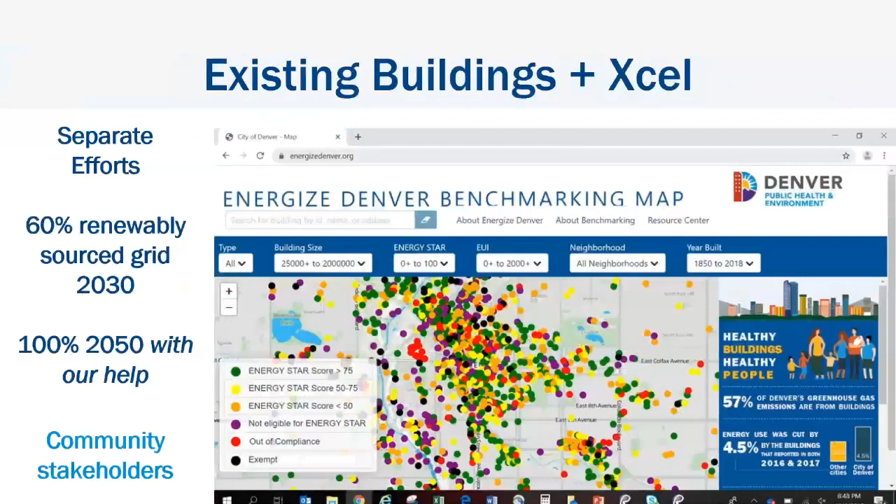There are separate ongoing efforts that the Office of Climate Action, Sustainability, and Resiliency is leading. I'm just not going to talk about that, and we're obviously not talking about that today with our IECC discussions, because that's not really what that code deals with.

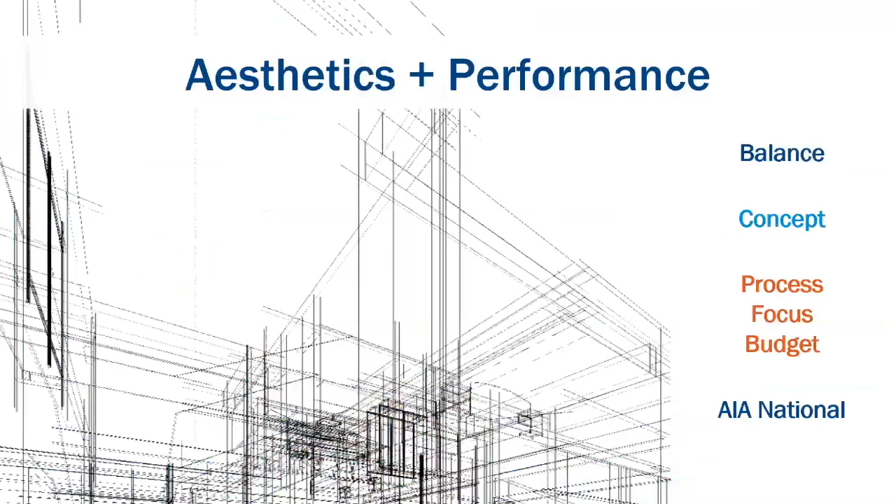Related to new buildings, it is our goal through the work we're doing in the coming years to get performance on the same plane with aesthetics. This is something that's been happening nationally for years, it's a process shift, and the changes and amendments we make to the IECC will help to support that shift.

We know that we can't just pass a bunch of rules and run away. We want to work in conjunction with the community, and when I give this lengthier presentation, I say that about 200 times. We don't do anything without working directly with the community to make sure that we're bringing everybody together along.

We're not just writing regulations in a bubble. It's important to mention the Office of Climate Action, Sustainability, and Resiliency, which I'll call CASR from here on. This team existed under DDPHE, the Denver Department of Public Health and Environment, and was formed as a separate office reporting directly to the mayor earlier this year, elevating climate action. It's 13 people right now with a plan to substantially add to that team, though current financial times have put some of those plans on hold for now, along with everything else. That's not a CASR statement, it's just where we are as a city right now.

That team has helped set the groundwork and lay the foundation for the work we're doing with the codes, starting with the 80 by 50 plan 2 years ago, a commitment to lower our greenhouse gas emissions 80% below 2005 levels by 2050. New buildings are part of that, with a milestone to get to zero net energy for all new buildings by 2035. That's really soon, that's 5 code cycles away.

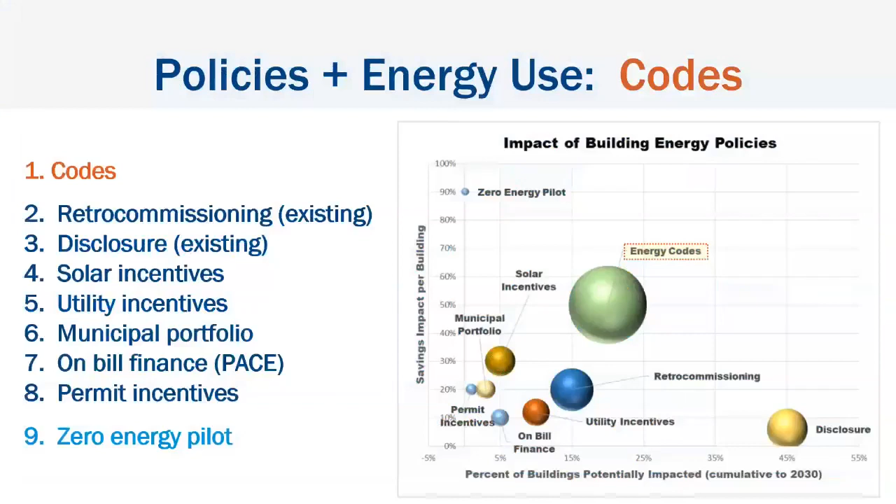Why are codes so important? Because even though we have some really high-performing, awesome projects that I could go on about all day because I'm so excited that we have them in Denver, they overall are not responsible for the major impact we need to make on our building energy use. The vast majority of buildings that comply with the mandatory codes are the big green blob that we have to address. That's why we really focus on our codes.

The CASR team secured funding through the American Cities Climate Challenge, which is awesome. It's money being given to 25 U.S. cities, $70 million over the course of 2 years, and it's helped us with an IECC compliance study, which is helping us understand what to target in our codes, what to target in our plan reviews and inspections, and how to work better with our team so we can get buildings to better performing outcomes. We are also going to need to target, with each of the next 5 code cycles, some very aggressive Denver amendments.

We started that process with the Denver amendments this year. We learned through the process. We asked the committee not to necessarily work towards one overall goal, but to do as much as we could, and we got pretty far. We got 15% better than base code, but it still didn't put us on the trajectory we needed to be on. So we know the process in the next 5 code cycles is going to require a partnership with the community to figure out how we work to a goal, not considering each amendment in isolation, but all together to get to a goal in the most painless way possible. That might mean we need to add workforce training or provide other support and resources.

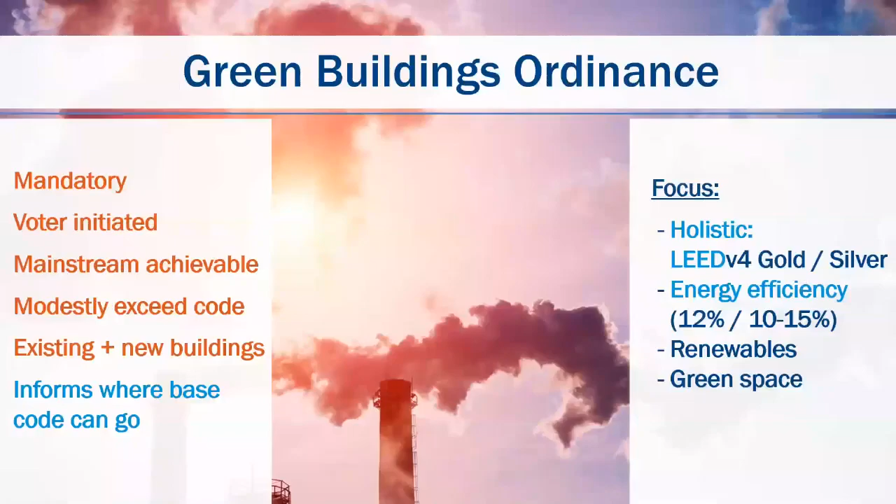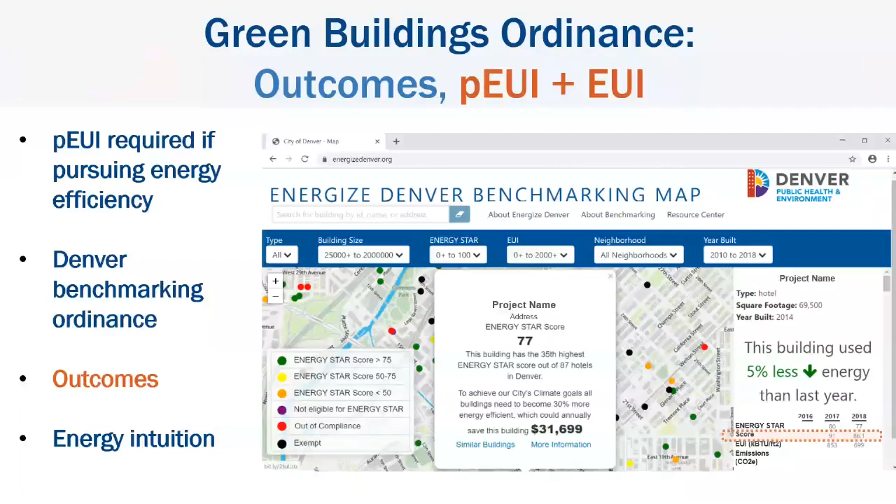We are using the Green Buildings Ordinance to learn about our buildings, and we'll be doing something similar with IECC submittal requirements, just to start to close the gap between our building outcomes and what they're designed to do. And this is because we're seeing that that gap is pretty broad. Our buildings are being designed at a high level, but they're not performing at that level, often using 2 to 4 times as much energy.

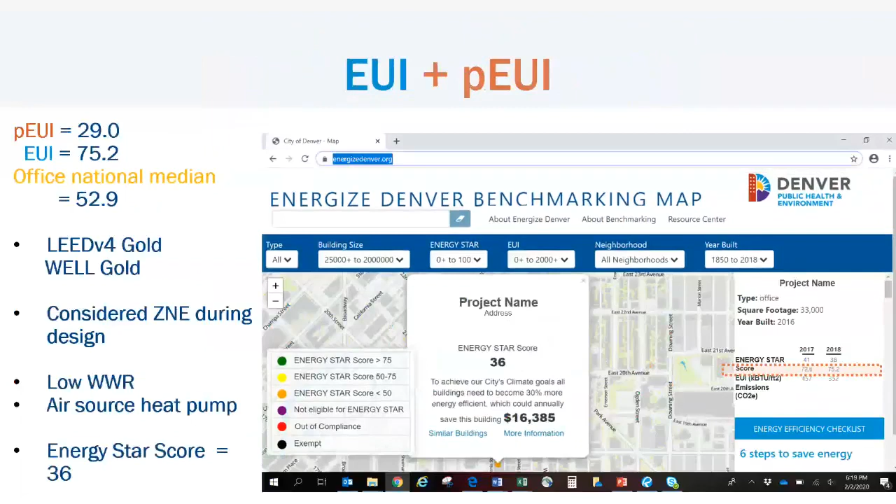That's not because any one specific team member is failing at all. It is a big, complex collaboration to get a building to perform the way it's intended, and that is the gap that we are going to be aiming to close so that we can support the Denver community in achieving our goals and keeping all of our citizens healthy and well provided for.

So the next group of slides, I'll just kind of flip through just to say that we, again, see the goal of sustainability as intermingled with equity and affordability as one goal. We're working across a variety of different city agencies and at a variety of scales. It's not just that we are addressing new buildings through the codes. There are a lot of other efforts going on at the district scale and the broader scale, and we're looking at the existing buildings and the sites and the neighborhoods.

And we're looking to our project teams out in the community to increase communication and also collaborate in a similar way across all of the entities who contribute to projects, and to really start drilling in and understanding the metrics related to energy performance a lot better.

So there are other things beyond code work that we're also looking at, other opportunities, other things that other cities are doing. We're looking at the planning level. We're looking at how we can integrate all of the different aspects of sustainability into the design of projects that are being built in Denver, because we're looking to how all of those projects contribute to the long-term viability of our community and our future.

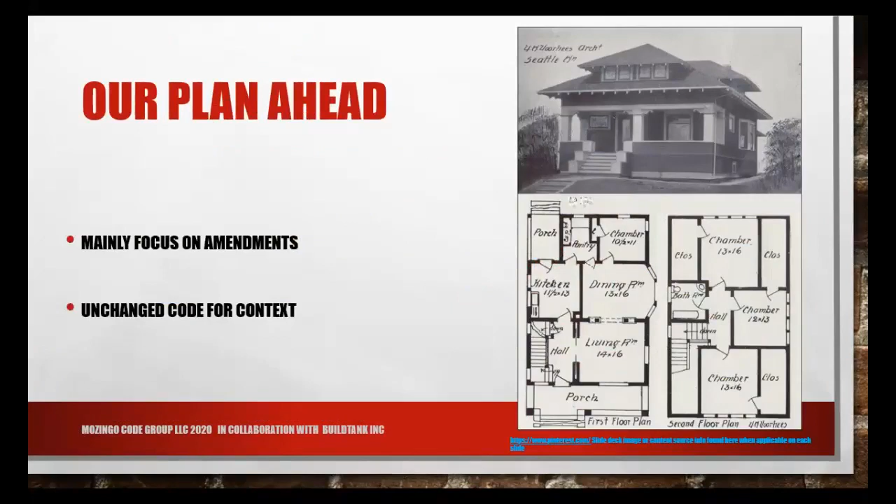Let's just move forward. A couple of things you have to know, there were some changes made. Typically, the IECC treats residential and commercial a little bit different than the other codes by just saying that maybe you could have some R2s, 3s, and 4s that are considered residential, even though they're built out of the IBC, so people automatically think that they're commercial and try to submit for commercial. Because there's been a lot of confusion over that, Denver did change their definition of a residential building to remove those R2 buildings. So R2s, your apartment buildings, are all going to be commercial now.

And that's been removed from there. So just want to clarify that when you're submitting a project for Denver that's R2 or an apartment building, you're going to submit it under the commercial requirements of the Energy Code. That being said, that means we're not going to be discussing apartments today because today is residential.

A pretty good change to bring some, to take the confusion out of whether it was 3 stories or less or 4 stories or more, and now it's just all one section of the code, so that's kind of nice.

We are going to go over some definitions today, just some different ones, but I'm not going to go over them right now. I'm going to go over them while we're talking about where we need to talk about them, right? So there's some new definitions that got introduced to the Denver's IECC, and a lot of them also will be in the 2021.

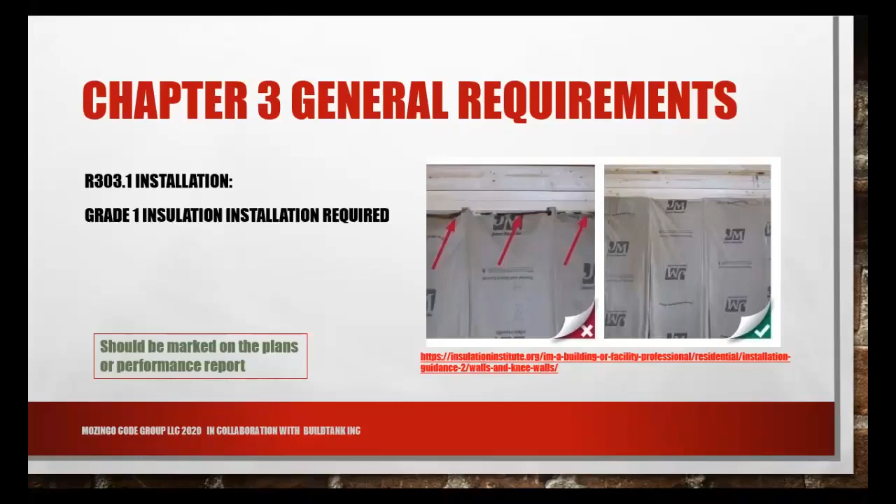All right, so we're going to talk a little bit about paths of compliance. In order to move forward, there were some changes. We still have the prescriptive path, which also includes ResCheck, and we have the simulated performance path and the ERI path. If you're going prescriptive, that's just 'tell me what I have to do and I'll do it' — you follow the book. There's not a lot of trade-offs in there unless you use the UA path, which a lot of people know as ResCheck, which allows you to trade off some insulation and windows as long as you keep the right U factor.

The change in that prescriptive path is bringing in this R407, an additional efficiency package option. The idea here is just like commercial — commercial has been doing this since 2012. The idea is that we want to bring in more efficiency in our buildings. So how do we do that and still have a building that's buildable, or affordable to build? We could have cranked the code down by another 5 or 10 percent.

But instead of doing that, we say okay, here's the code requirements now, and on top of that, here's some options. You choose how you get the other 5%, or how you get the rest of the way there. So it provides options, and we'll go over those when we get to that section. It's not like we're trying to go way, way above code and be an above-code program. This is about meeting the minimum requirements — you have to choose that additional option, but it's there so you can choose how you get the efficiency out of your building, what works best for your design, rather than just being told how to do it.

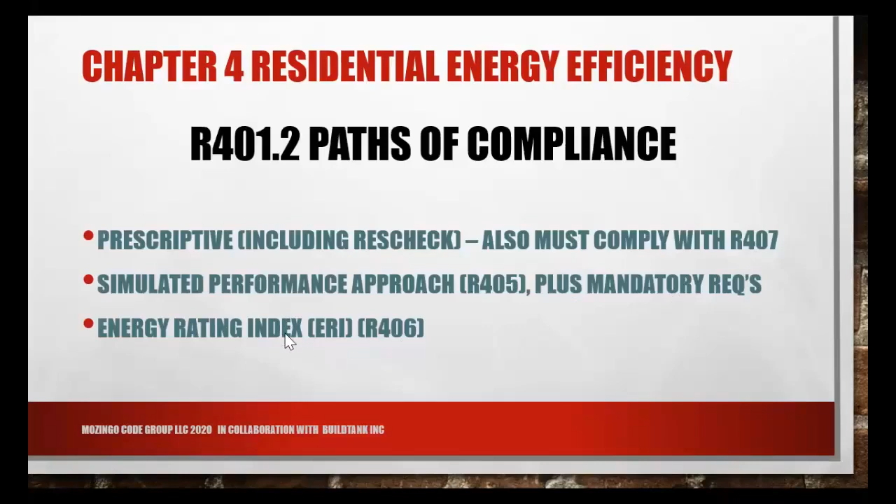What do I mean when I say mandatory? The code, at least through 2018 anyway, has the word mandatory in it. So what does that mean? Isn't the whole code mandatory? In the energy code it's a little bit different. It allows trade-offs here and there. So the word mandatory is letting us know that no matter what path you choose, no matter what you're doing, these items can't be traded off. You have to do them.

They're usually things like you have to seal up your thermal envelope and get good air leakage. You have to do good lighting, you have to do your right mechanical efficiencies and mechanical controls. But insulation, R values, U factors, those kinds of things can be traded off. Even duct leakage and air leakage can be traded as long as you make them up somewhere else. But the other things are mandatory, you can't trade those off. That's what it's talking about.

So when I'm doing plan review, I'm always looking, did they use a trade-off path? But no matter what, those mandatory requirements are for every path. I definitely have a little checklist where I go through and make sure they've met the mandatory requirements.

Prescriptive is a pathway, so you could choose that path. That's just, tell me what I need to do and I'll do it. Res check fits in there, or that UA trade-off path fits in there, so if you choose that path, you can trade off some envelope as long as you make it up. Maybe you put in a better window to lower the insulation in a certain place, or vice versa. But that's about it. It is a pathway, and you can choose it.

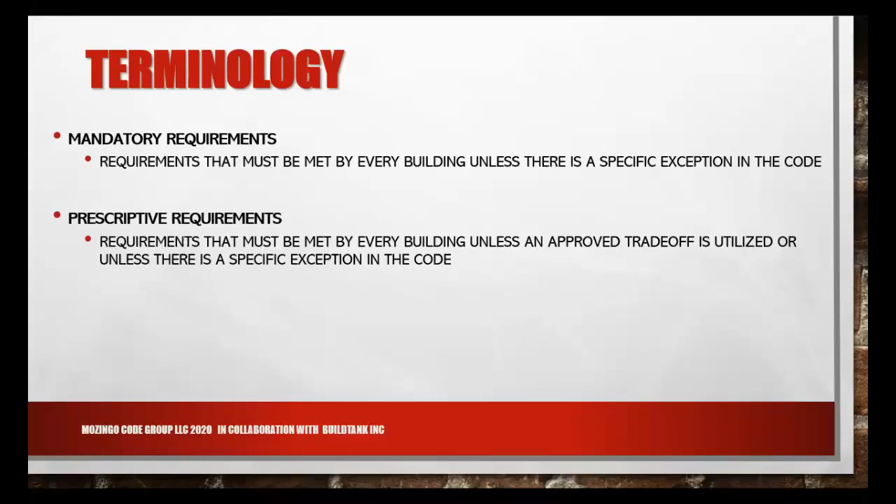I just don't see very many people do it unless you're way out in some remote area where there's not a lot of people that know how to do performance. Sometimes it can be more expensive to go prescriptive because you have to use these specific values, and you can't do a lot of trade unless you're using a little bit of res check.

And then you have performance, which is looking at the overall performance of the entire building. That usually has a third party involved that knows how to use that equipment or the computer program software, and can compare the building that you want to build to the building that's the code requirements, and how much energy you're using the way you want to build it. It allows more trade-off.

So the thing that I would say is the documentation on these paths, as a plan reviewer, what has to be on the plans. Prescriptive is strictly right out of the book. Are they doing what it says? If it says that it needs an R20 in the wall, is that what they're doing?

And performance is looking at that report that you get from the rater or whoever that says, okay, we're not going to do that R20, we're going to do an R15, but we're going to make it up over here with our really tight envelope, or really good lighting, there's different things that you can trade off. So looking at those reports and making sure that they match the plan.

That's the biggest thing that I see as a plan reviewer, is that I'll look at a set of plans. The rater or whoever's making the res check is putting in whatever value that they want to get it to pass. But when you compare it to the set of plans, the plans might say 2x6 construction at 16 inches on center with R20 in the walls. And you look at the report and it says 2x6 at 24 inches on center with R15 in the wall. Well, the plans have to match so that that's what's getting built. So really that's the biggest thing between doing plan review to those paths.

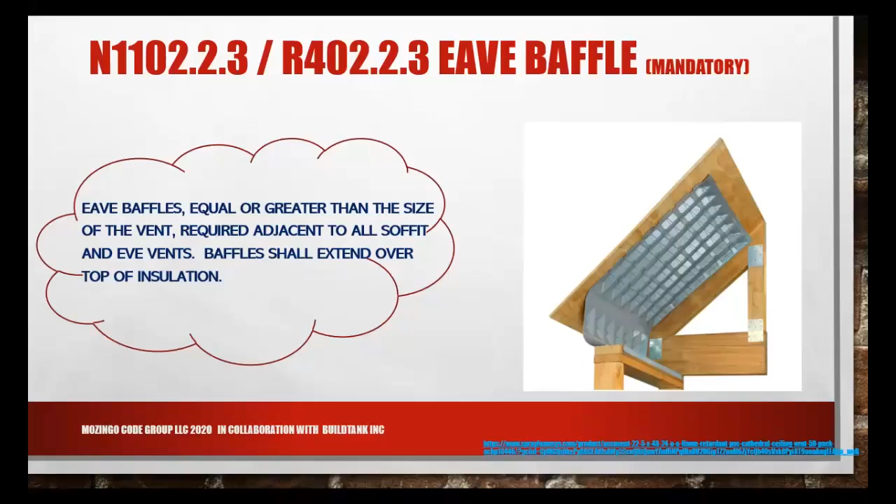I want the inspection process and the construction process to flow. I don't want them to get held up. It takes 2 seconds to put a stamp on there that says don't forget your eave baffles. Whether they read their plan or not, if they get held up after I've put everything on the plan, that's a different lesson they have to learn. But I'm going to put everything on there that I can.

So there's some changes for floor insulation. There weren't a lot of changes for any of the other insulations when it came to Denver. The floor insulation change really wasn't in the R-value, it was just in the install, and this will be in the 2021 code also.

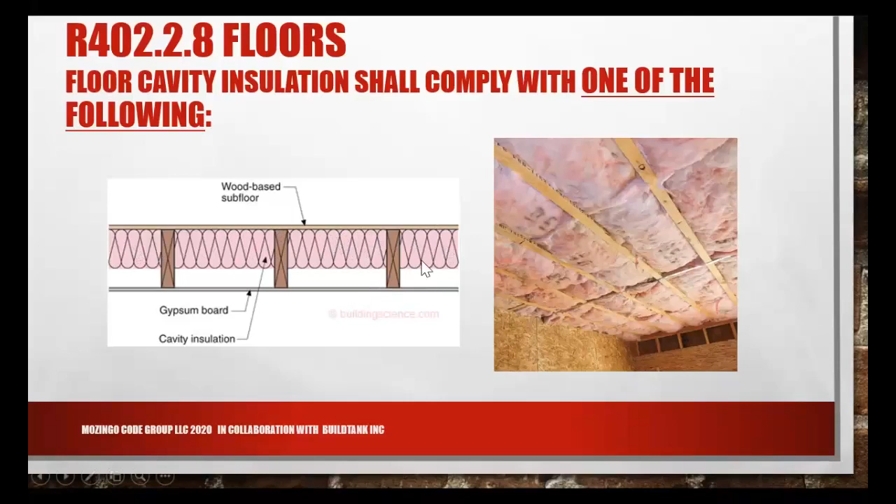So this is still an allowable way, but it's just one option now. You can also drop your insulation down to the bottom of the floor, put in your full R30 right on top of the sheathing or drywall or whatever is there, drop it down as long as you fully insulate all the way around, so you're basically building this nice insulated plenum. Then you can run your ducts and pipework in there, and they would be inside the conditioned space because they're on this side of the insulation and the air barrier. So that's an option.

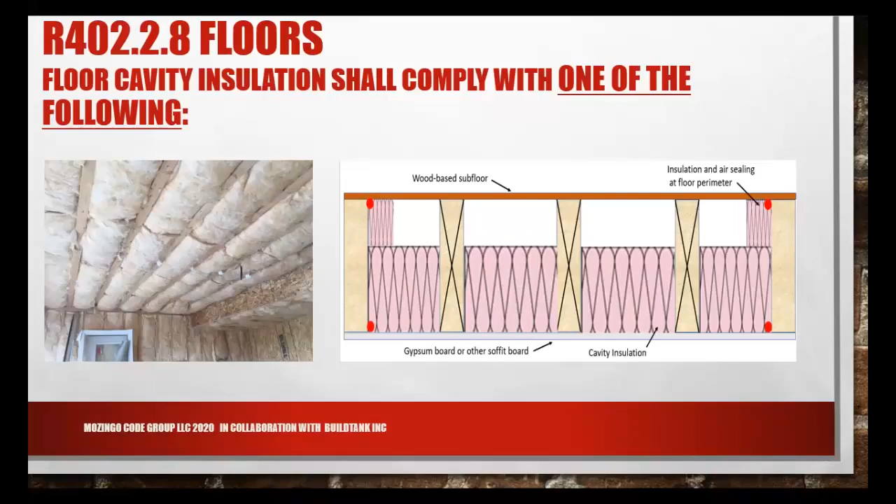Sometimes you can't get an R30 in the floor cavity, so another option is, yes, drop that insulation down there, get as much as you can, and then get the rest of the way with an insulated continuous insulation on top of your drywall or your sheathing. So you could do your cavity insulation plus your continuous, add the two layers together to get there. So there's a little bit more options in there.

Those were in there in the '18 and the '15, but it was really hard to read. So Robbie did a great job of getting the code cleared up and getting these sections in there a little clearer and more defined. So those are good options that are in there.

Now let's talk about testing. Testing for air leakage, right? So the code has always required as a mandatory, you can't trade this off, that you do air testing, and your testing is at 3 air changes per hour at 50 pascals. Well, there's a couple things that make that a little bit hard to do, and so Denver has done...

And the 2021 actual code will do this also, but it says okay, we understand that 3 ACH is very easy to get in a large home where you have a lot of volume of air, especially a detached large home where you don't have any attached walls, and you have this large volume of air. 3 ACH with good detail is easy to get. We find that 90% of the people come in under 3 ACH even before that requirement ever got into the code. It's when you get a smaller house or an attached house that it gets a little bit harder to do, because you have less volume and you're dealing with common walls that are hard to seal.

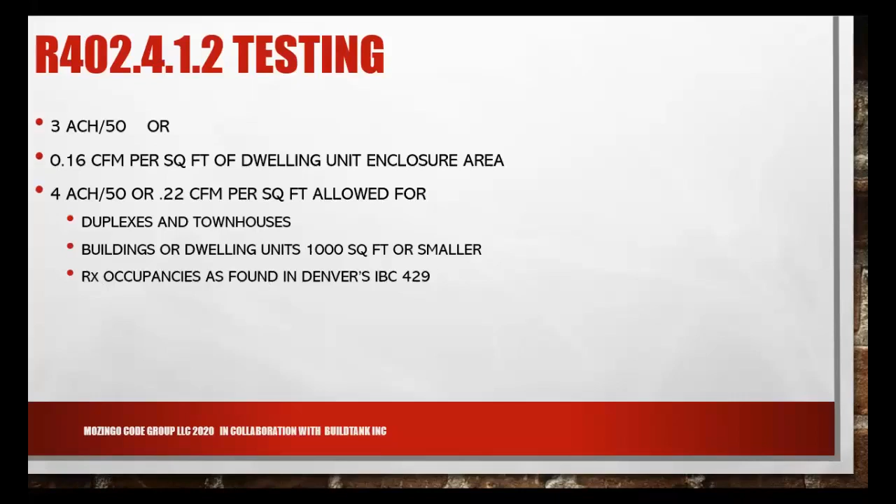It's not a rollback, it's just reality in saying let's give some options so that these guys in smaller houses or attached houses have a fighting chance of actually complying. It's talking about dwelling unit enclosure area, a defined term that's the sum of the area of the ceilings, floors, and walls separating dwelling units from conditioned space to the exterior or unconditioned space. So you're looking at the volume of the whole house, not just square footage.

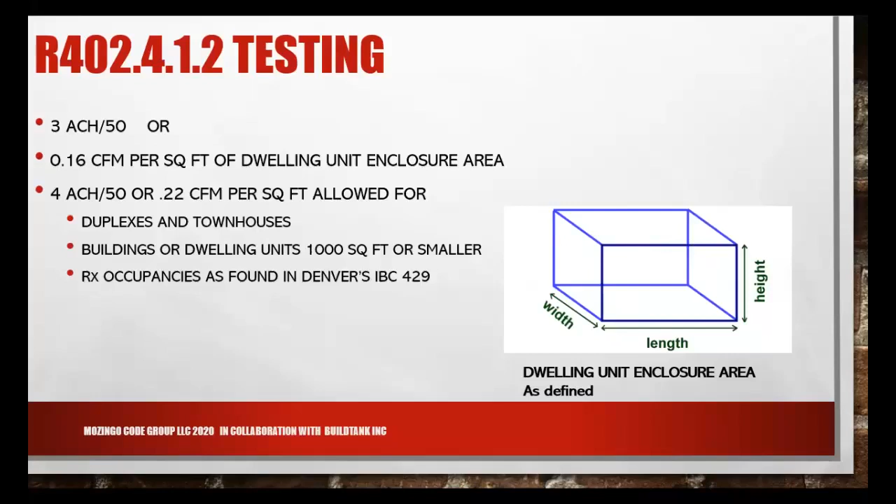RX is a kind of new occupancy in Denver. It's for residential, in the building code. It's a group of 2 or more detached buildings, each consisting of a sleeping unit where occupancy is permanent in nature. They can't have a cooking facility. It doesn't say here, but it has to be 400 square foot or less. You still have to meet your building code room areas, like 7 foot ceiling heights and minimum areas, but can't be over 400 square feet. So there are some requirements in there.

You can build them to the IRC or the IBC. They can't be more than 1 story. We're really looking at no basements, and they can't have a cooking facility - no kitchen, but they have a detached cooking facility that everybody shares.

This is looking at maybe finding a way to deal with homelessness, and making these communities where you can provide smaller units that just have one big kitchen or dining facility joint to all of them. Denver still wants them to deal with homelessness and try to provide these communities, but also make sure they do the due diligence to make sure they're energy efficient.

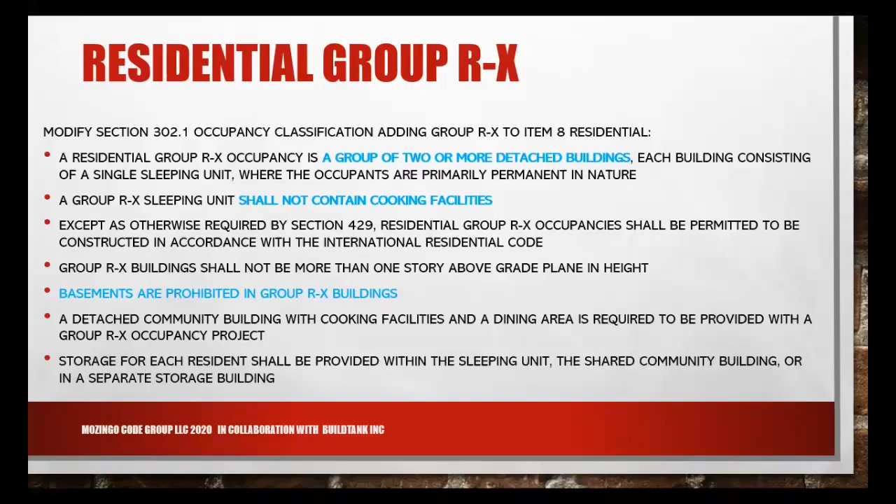Air leakage - we're definitely trying to keep all the nasty air out, the pollutants, the allergens, but we're also saying, okay, we paid a lot of money to heat or cool this space. We want that air to stay inside the building. That's why we're looking at air leakage testing.

The blower door test looks at how much air made it into the building. We have a little bit of air leakage - we want it to be this much, we don't want it to be this much air leakage. We don't want to pay to heat and cool all this and have it go out of the building, and we don't want all of that nasty pollutant to come into the building. So that's what we're trying to do with a blower door test, among other things.

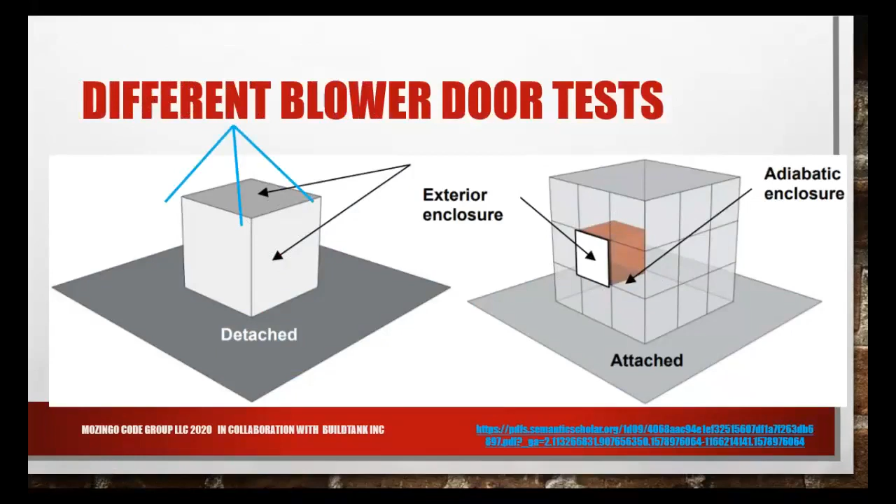There are different kinds of tests. If you have a detached house, it's pretty easy to just test the whole house and the envelope. But when you have a multifamily or townhouse or attached duplexes where they're attached together, it gets a little harder to test that full envelope. So you sometimes have what we call a guarded test, where they look at different areas of the building and you have to compartmentalize the house.

If you're attached, you want to know what the pressure of your house is. You don't want to worry about what they're doing - what is my test, am I passing? That's hard to do because if you have any leakage in the common wall, you're going to be pulling their volume and you're not going to pass. So how do you get a true reading?

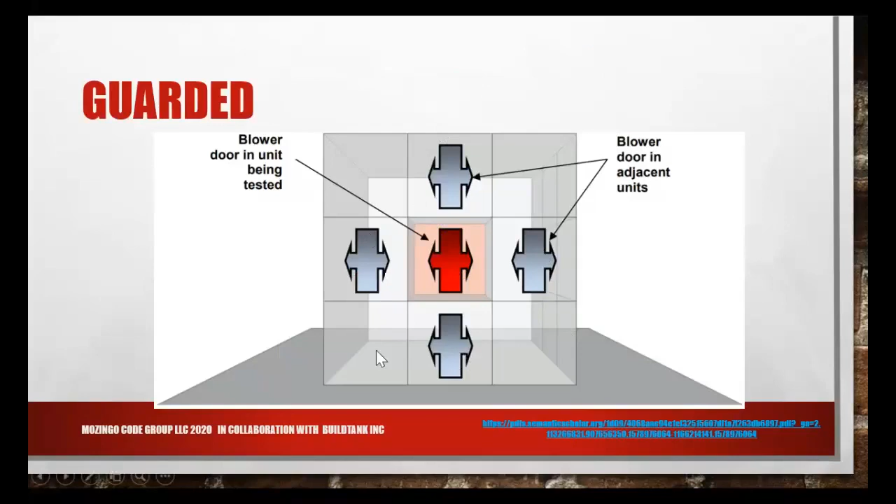It's to really just have a guarded test where you actually put blower doors all around it. Or if you're in attached housing like this, you would test this house and pressurize both houses on each side so that you're really getting a truer reading here, and not pulling that air from the common wall. It's expensive, right? That's why it's important if you have attached housing to really get those details right.

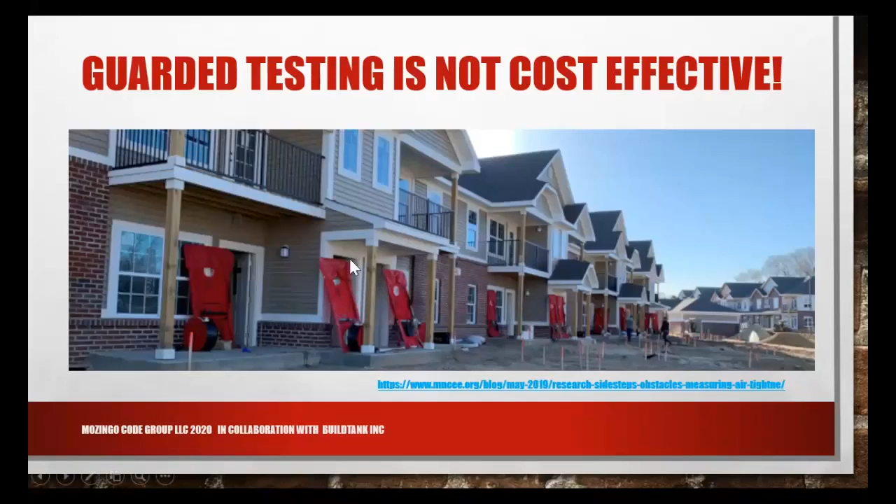If you're a plan reviewer, it's important to make sure that they're getting those details right, so that they pass, because if they get the details right, they could actually test one unit by itself, but it costs a lot to have all of these extra tests or equipment. Not everybody has so many sets of equipment to be able to do this, so it's much more efficient to just get these details right.

At a minimum, I really make sure that I get details for like shower and tubs and fireplaces and stuff that are on exterior walls, because that's hard to come back and fix after the fact. Once that tub gets in place, it's hard to get behind there and make sure I have my air sealing and everything. So I really do take some time to make sure that is in place, and it's good to get this detail as a plan reviewer. That's about what you're going to get for air sealing.

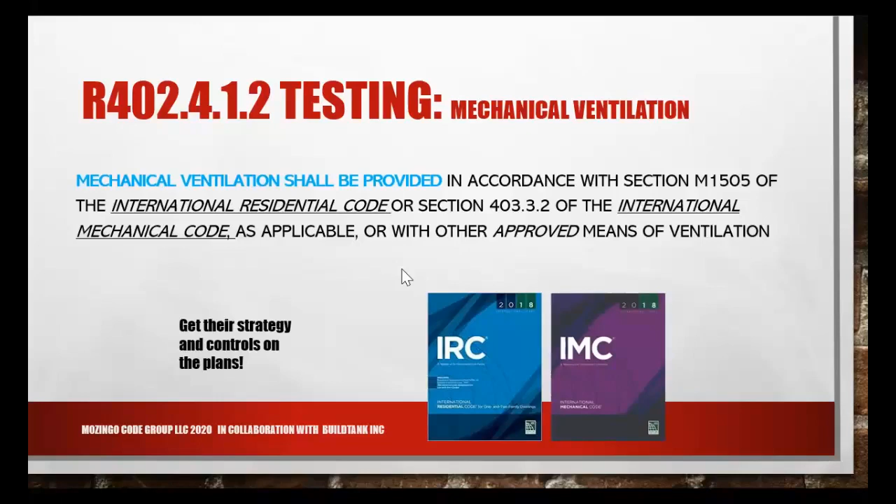And it never says that it's not allowed to run, it says you have to have an automatic shutoff. So what are you looking for? I always ask, what control are you using? Are you running continuously? Are you running only half the time? What kind of control are you doing that just a simple on-off switch doesn't get you there? So those are the kinds of things that I'm looking at in plan review.

Again, the M1505, which is the mechanical section of the IRC, will tell you what strategies you're allowed to use and how much air you have to bring in. So the plan review, that hasn't changed. It will change in the 2021, but it hasn't changed. Right now, you're still allowed supply, exhaust, or a combination system.

In 2021, requiring an exhaust-only strategy will no longer be allowed, because if you're building the house so tight, you don't want to suck all the air out when you don't have enough holes to bring fresh air in. So that won't work in the future, but right now it's still allowed. Just make those comments on the plan.

If I use a positive supply and pump a bunch of air in, eventually as we build houses really tight, even though you're allowed supply only, exhaust only, or a combination, you want to think about the strategy. If you're a designer or builder on this webinar, think about this. If you're under 3 ACH and getting down below 2, you don't have a lot of holes in the building. So if I use supply only and pump the house full of air without enough holes for it to get out, what am I doing? I'm forcing air out, and the holes I do have become larger over time.

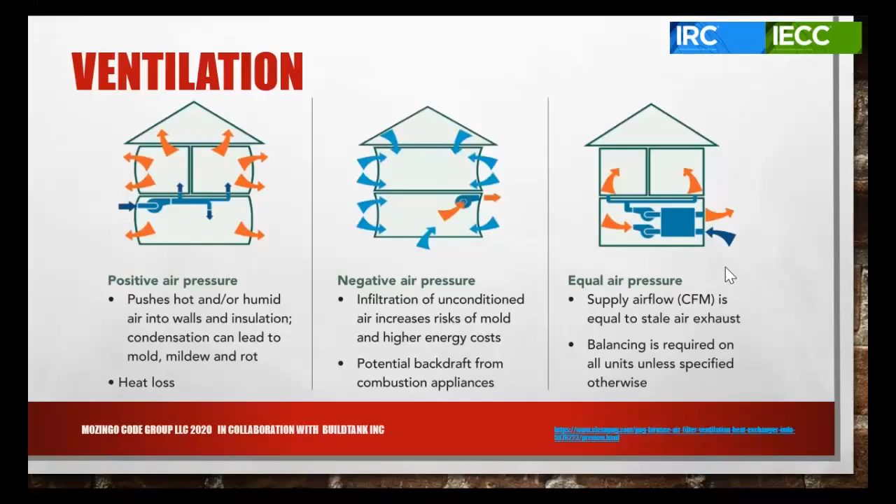If I'm using exhaust only, I'm forcing air in through the little holes I have, bringing in whatever temperature and contaminants are in that air, and forcing stuff through holes it shouldn't go through. At 3 ACH, this strategy still works, but when you get a lot tighter, you might want a balanced system that lets as much air out as comes in, so it flows. It doesn't have to be an ERV or HRV—a lot of people use their furnace system with air into the return side and supply out. There are different ways to make it work.

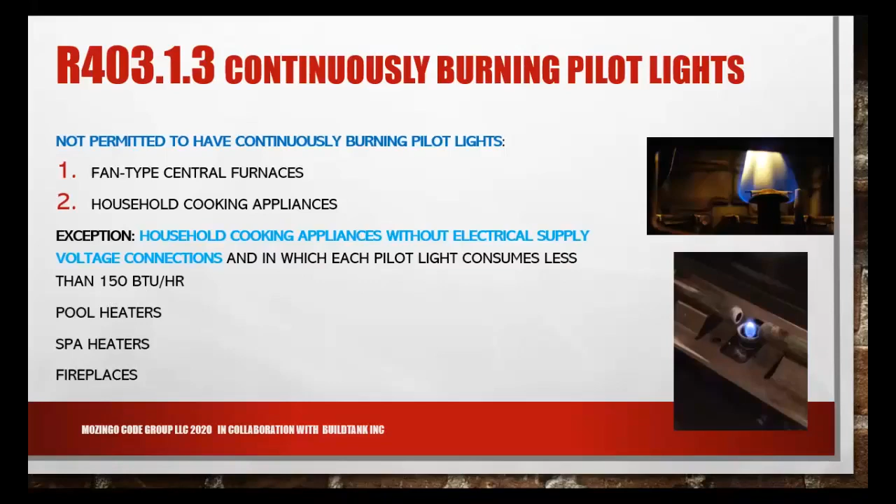Something else Denver has added is addressing continuously burning pilot lights. You don't want this burning all the time since it uses up resources, so we want to make sure they're not continuously burning. There are some exceptions if you have gas appliances without an electric supply connection and it uses less than 150 BTUs. So all the codes are pretty much against continuously burning pilot lights right now.

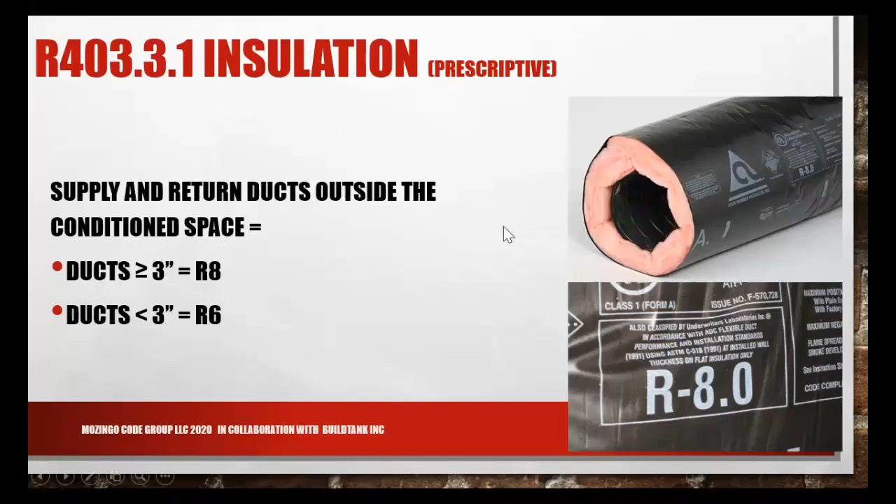Let's get into ducts, section 403, the mechanical section. It used to say you need R8 in the attic on your ducts and R6 anywhere else. The code changed to say if you have a 3-inch duct versus an 8-inch duct, why need the same insulation? So now if your ducts are greater than 3 inches, you need R8, and less than 3 inches, R6—and that's only for ducts outside the conditioned space.

This is a confusing section in the code as it is, and there are some Denver amendments, so I want to make sure we understand duct testing and how we'll handle this at plan review. It's mandatory that you test your ducts. We'll probably see on the next slide that it's prescriptive, meaning the amount of leakage can be traded off, but the fact that you have to test is mandatory.

In the code, it's always been mandatory to test your ducts if any are outside the conditioned space. But in the Denver code and the upcoming 2021 code, you're going to test all the ducts, whether they're inside or outside the envelope. You're still using energy by having a leaky duct, no matter where it's located.

So let's walk through that. All ducts are tested for air leakage, except ducts for ventilation systems, as long as they're separate from your heating and cooling system. There's an exception if the duct system serves less than 1,200 square feet of conditioned floor area—they still have to be tested, but look at the rate of leakage they're allowed. It's a lot higher than your regular leakage, but that's for ducts inside the thermal envelope.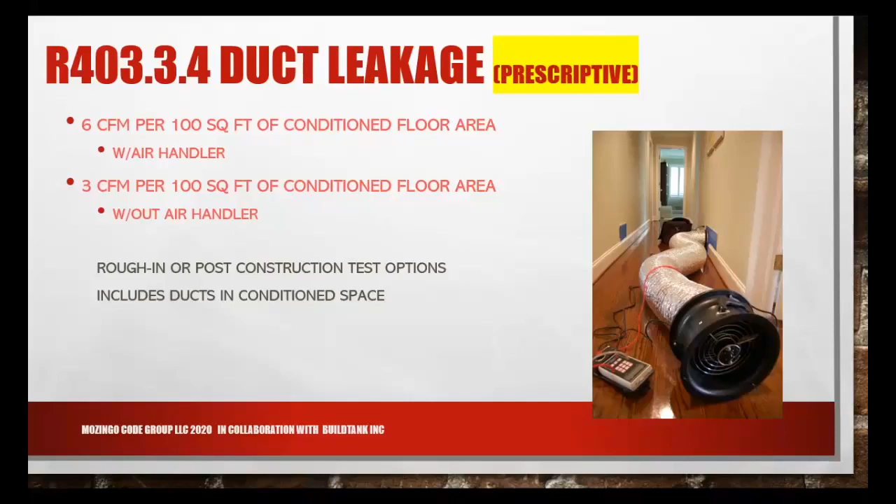How do I determine ducts in conditioned space? If you're going with a performance approach where you can trade things off outside of just insulation and windows, there is a huge benefit. Anybody who's done computer modeling could see that if I model my building with all the ducts inside the envelope, I get a very big credit and can get out of some other things, or lower my insulation, or get a different U factor on my windows, or whatever you need to trade.

There's a big credit for putting your ducts inside conditioned space when you're using a performance approach in that modeling software. So what do I have to do to those ducts to have them inside the conditioned space? This made it into the 2018 code and got a little bit more refined in the 2021. This is just saying, in order for it to be considered in conditioned space, it has to comply with one of the following: completely located in the conditioned space inside the thermal envelope. That's kind of a given.

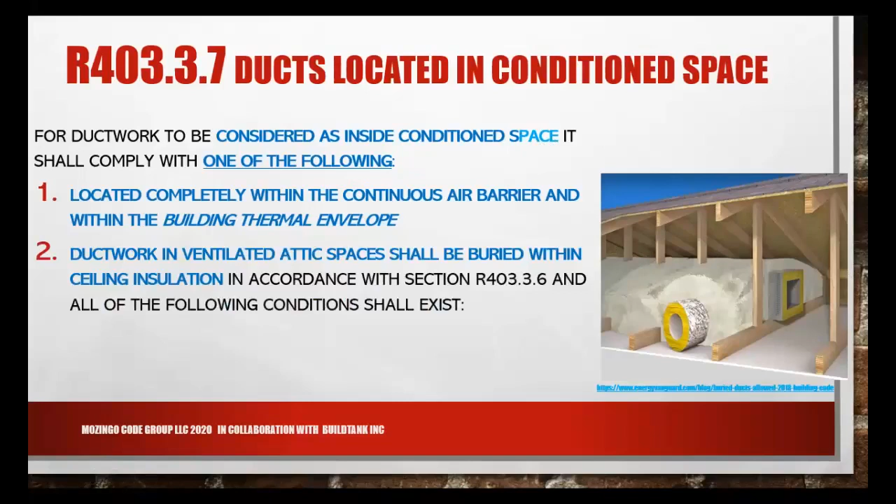Or you could bury your ducts. So if you're in a ventilated attic and you're putting your ducts in the ceiling, you could still call those ducts inside conditioned space as long as they're buried accordingly. There's a requirement in the code that says put a certain amount of insulation under the duct, insulate the duct, and a certain amount of insulation over the duct, and then it can be called in conditioned space so that you can get that credit in performance.

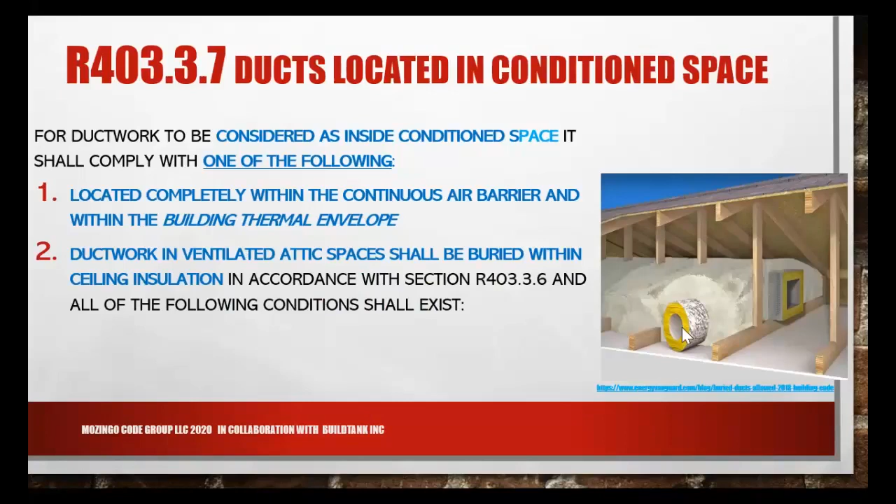And you have to decide, is the expense of burying them worth the credit that you get? Usually it is, but it's also really great for handling moisture issues in the attic and all that condensation. So it is definitely a huge benefit. And to be honest, the National Association of Home Builders are the ones that got this into the code because they found that much benefit in it.

So, into the national code. All right, let's see, we talked about ducts in conditioned space: inside the envelope, or buried in your attic.

The ceiling insulation R-value installed against and above the duct must be greater than or equal to the ceiling R-value. So by the time you add up all the layers, you're at least equal to the value of insulation required by code.

You can also call it conditioned space if it's located in the floor, like a floor over a garage, as long as the air barrier is between the garage and the house and the insulation. So there's an air barrier between the insulation and the unconditioned space, maybe a crawl space, wherever it is. It's installed according to your option in a floor, either against the sheathing or dropped down and installed correctly, and you have at least a minimum R19 below the duct.

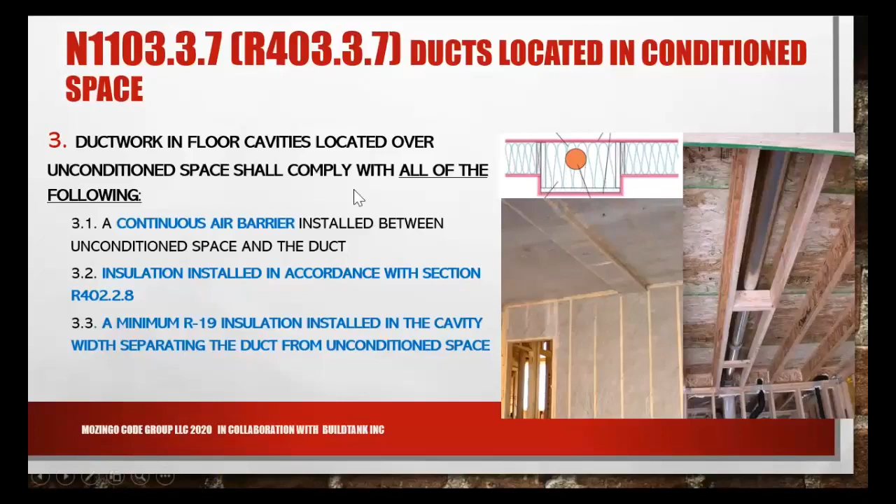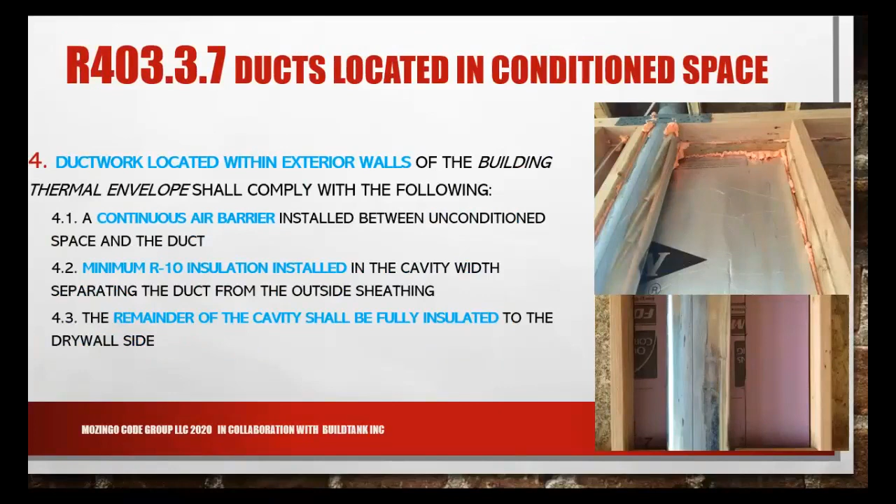So that's if it's in a floor, and then you can also do it in a wall, if you want to put your ductwork in an exterior wall. Most people are getting away from that practice, but you can do it. You just have to put a continuous air barrier between the duct and the unconditioned space, minimum R10 in the cavity, and then the rest of the cavity is filled. So there's some different requirements there.

But actually they're options, so I call it a requirement, but there really are a lot of different options. That's what I love about the 18 code, is that it provides more options than any other code did. You might get more efficiency out of it, which is just a bonus, but it gave you so many more options. There's a lot of people trying to move to a newer code right now, and I'm telling you, 18 has the most options, and Denver even added more options, so that's great.

Whole house mechanical ventilation system just means whichever fan you use for your ventilation system has to meet this efficacy. Now if you have a range hood and you're not using it for your ventilation system, as a plan reviewer I don't go and make sure everything is this efficiency.

It's only if it's the one they're using for their ventilation system. I'm doing a residential study right now in Colorado, and this came up, and PNNL and DOE clarified that, no, I'm not out there verifying that every single fan is this efficiency. I'm verifying because we're just talking about the fan in the whole house mechanical ventilation system that's required - which one did they use, an exhaust-only strategy or whatever - that needs to be that efficiency. So just make sure you're looking for that.

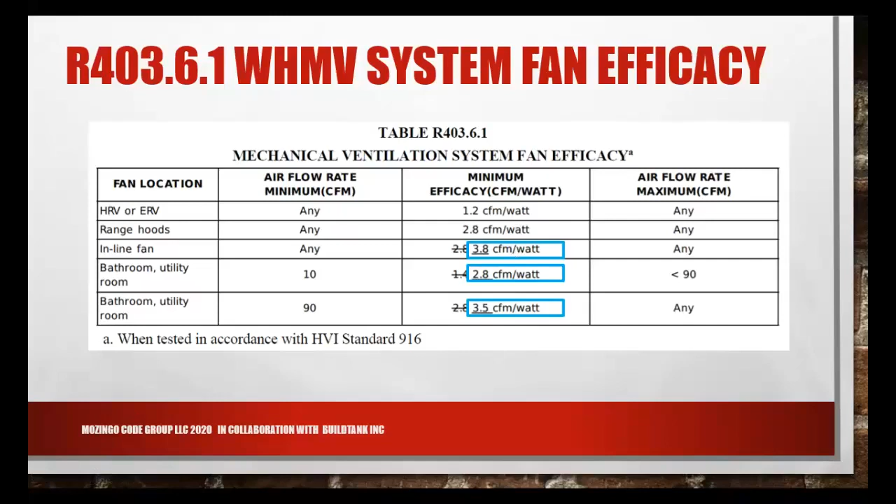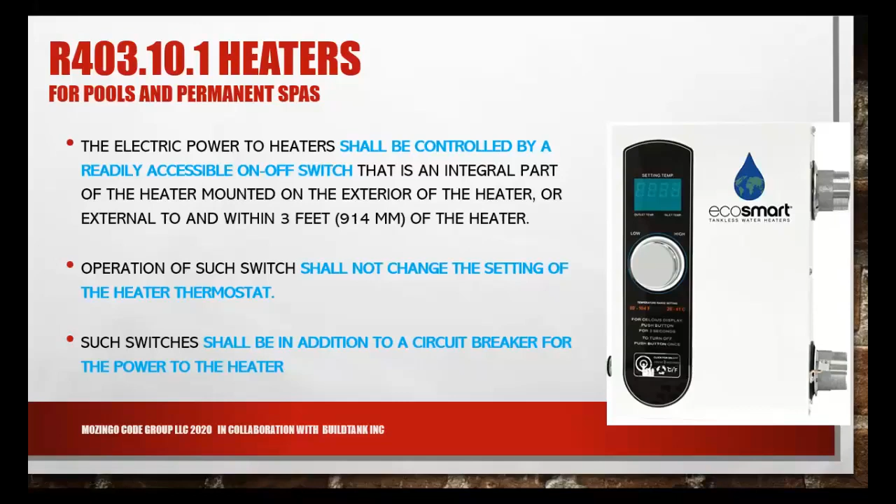Heaters, pools, and spas - there's some requirements about the controls for the heater, making sure there's a readily accessible switch so people can turn it off. But when they do turn it off, it doesn't just reset all of the settings on the thermostat. And the switch has to be in addition to the circuit breaker for the power of the heater - don't just use that circuit breaker. So those are some requirements in Denver for pools and spas.

Lighting - the code has for a long time required 50% lighting to be efficient, then 75%, now it's 90% of the permanently installed fixtures have to be high efficiency. But there's a new definition for high efficacy lamps: compact fluorescent lamps, LEDs, T8 or smaller, or other lamps or light sources with an efficacy of not less than 65 lumens per watt. So that's the change, and it's also what will be in the 2021.

There's a requirement here in the residential provisions of the code that maybe we need to look at - this is a new section for exterior grounds lighting. I want to be sure you know that when it was proposed, it was really for apartments and R3s and R4s. Well, apartments got moved to the commercial code, so now this doesn't apply for apartments - they're going to have to do whatever the commercial code says anyway. So this is really for your R3s and R4s ground lighting.

So R3s and R4s, but only those that are 3 stories or less, have to comply with the commercial requirement, because it's the C, commercial, section of the energy code for exterior lighting. This does not apply to any of your residential buildings except those R3s and R4s, 3 stories or less.

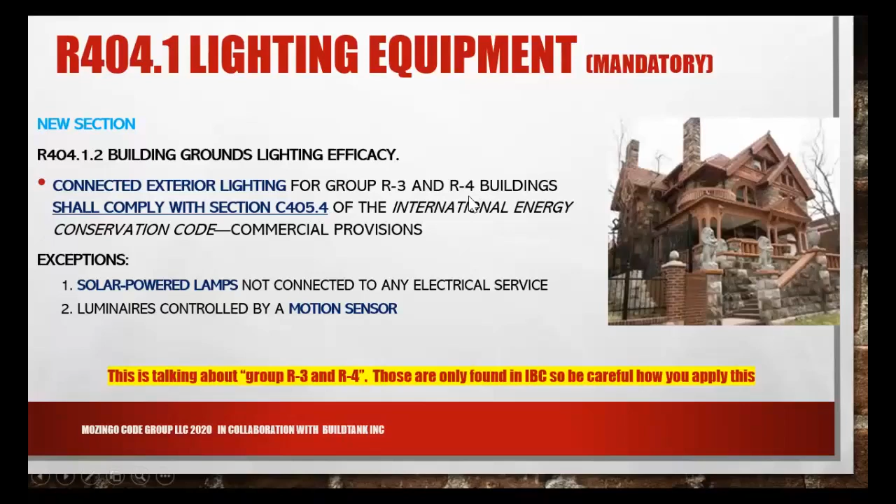Electric vehicles. This is new to Denver, and it's also going to be in the 2021 code, so it's not going away. Let's look at it: buildings shall be provided with EV charging. They give a whole section on electric vehicle charging.

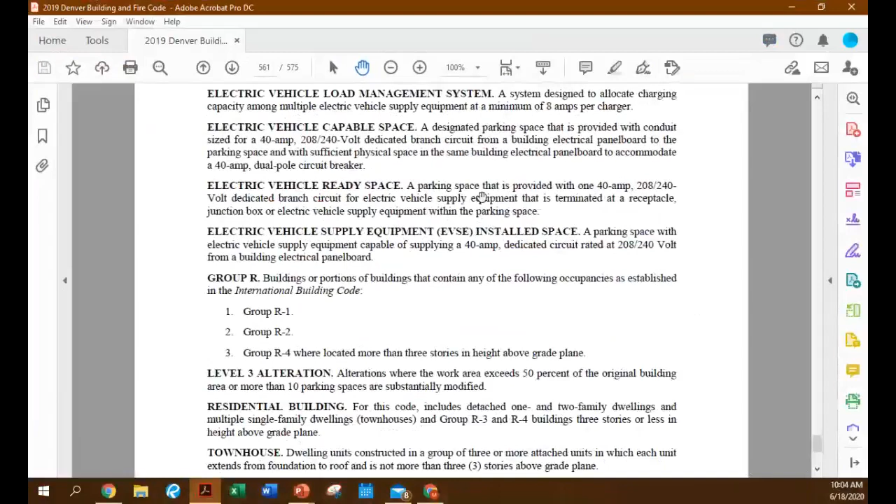That's why in the beginning we talked about all those definitions for electric vehicles. I'll put it right here on the screen so we can see the different definitions. This is Denver's code right here: electric vehicle, electric vehicle supply equipment, electric vehicle load management system, electric vehicle capable space.

That's a space provided with conduit and a dedicated circuit from the electric panel board to the parking space, with sufficient physical space in the same building electric panel board to accommodate a 40-amp dual-pole circuit breaker. So it's a space with the conduit run and space in the panel board.

Electric vehicle ready is a space provided with a 40-amp, 240-volt dedicated branch circuit for electric vehicle equipment that is terminated at a receptacle, junction box, or electric vehicle supply equipment within the parking space. So it's ready to be hooked up, capable to be run. Then you have electric vehicle supply equipment installed space, a parking space with everything actually installed. So there are some different definitions there.

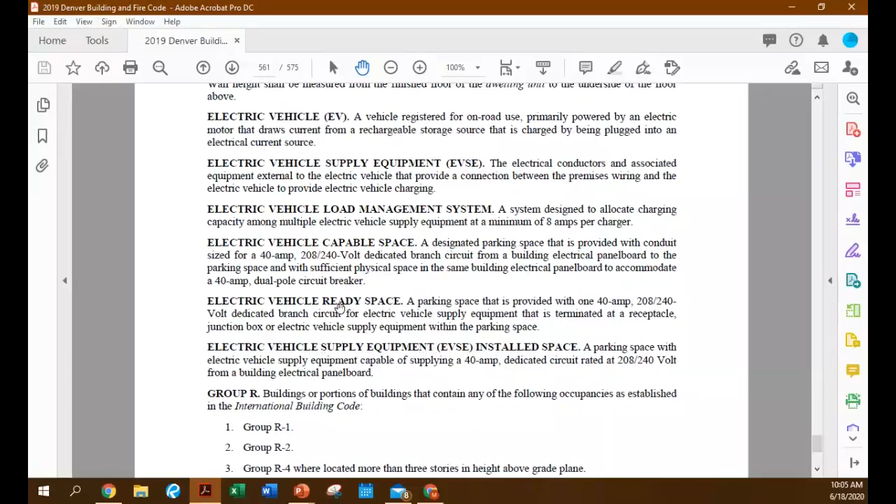Be sure you're familiar with those in order to do this requirement. For dwelling units, each dwelling unit with a dedicated attached or detached garage or on-site parking spaces has to provide at least one electric vehicle ready space. So the conduit is run.

The power is run. The branch circuit shall be identified as EV ready in the panel board, and the termination location shall be marked as EV ready, so we're going to let them know what's going on. One space, if you have an attached or detached garage or a parking space, has to be electric vehicle ready.

And if you have 3 or more dwelling units or sleeping units, or group occupancies with 3 or more dwelling units and/or sleeping units, they shall be provided with EV spaces according to a table. We'll look at that in a second.

Before we look at the table, you just need to know that if you calculate that you need 3.5 spaces, that means you need 4. You round up.

All electric vehicle supply equipment installed, EV ready, and EV capable spaces are to be included in the calculation for the number of spaces provided by planning and zoning.

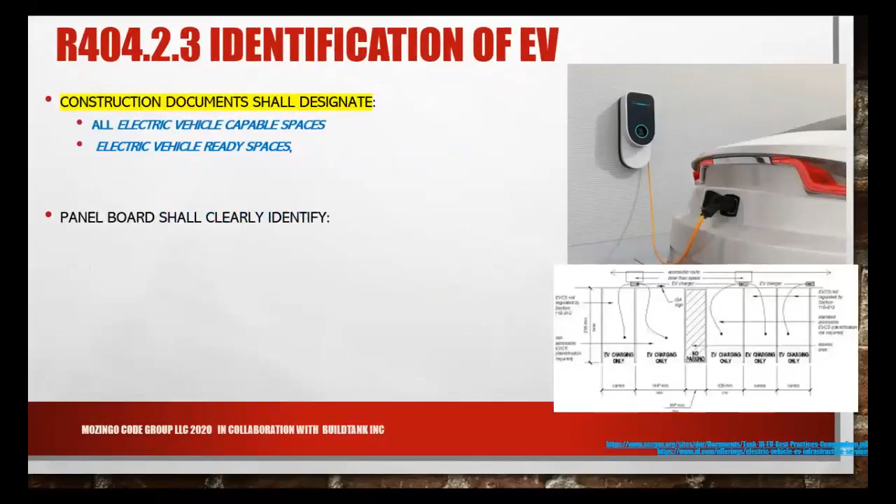Construction documents have to designate all of the capable spaces, all the ready spaces, and all the installed spaces, and the location of the conduit and termination point—that's where we're at in plan review. The panel board has to certify the reserved spaces for all of those, and the conduit for the space has to be clearly identified at the panel board and at the termination of the parking space that it's for EV. So plan review is simply checking: did they have all of those spaces, did they document the right conduit and all the right things, and clearly identify everything?

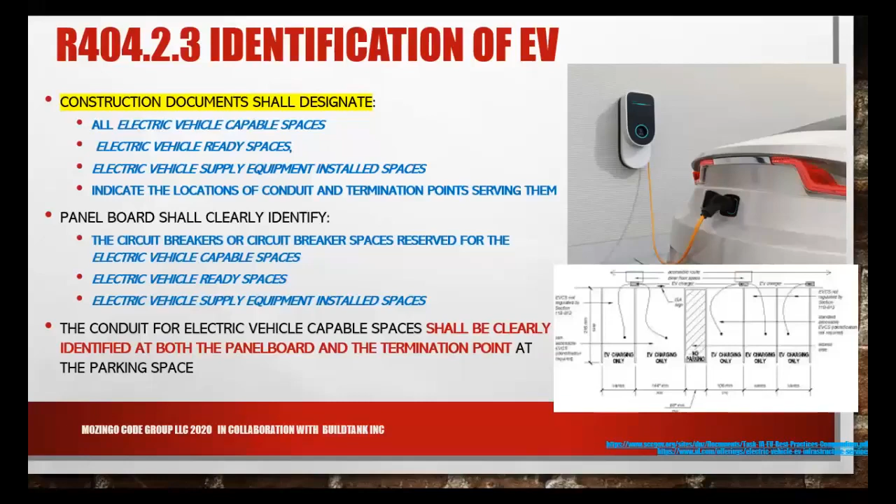Then you need to consider accessible parking. I'm working with several jurisdictions right now, and a lot of them are adding EV to their existing 2018 code because they know it's coming in 2021, so they want to be ahead of the game. What we're dealing with now is how do we handle accessible parking?

I don't want to make my only EV-ready or capable space the handicap one, because then people will be parking in that accessible space who shouldn't be. But I don't want to make my only space not accessible, because then if I need that space... so you have to be careful with that when you're writing your plans and doing your plan review.

Denver does say that where you have EV installed spaces or new EV ready spaces and accessible parking both provided, at least one of those accessible parking spaces has to be EV ready or EV installed.

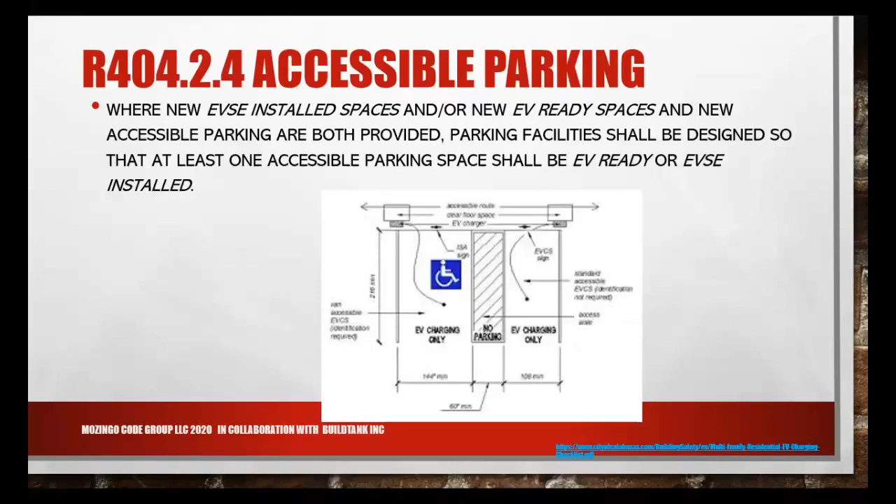That's good. I don't know, I guess I should read the language again, because now as I'm thinking through this, at least one of the accessible parking has to be that. But what if you only have one requirement for one? Can it be in the parking? I think you would have to do one in each, so that you don't have people stealing parking spaces from each other. But here's the table.

So here's your numbers. Who's looking for this on the plans? It's going to be really common at apartment buildings, which you're not going to be looking at for residential plan review anymore, at least not for energy code. But what about other complexes or places with a lot of duplexes or townhouses that have shared parking spots? Or even a detached house with an attached or detached garage now. So just be aware you have to look for that.

All right, pathways of flexibility. Pathways equal flexibility. We don't have just one way through the code. I'm only going to talk about... we talked about prescriptive and simulated performance. There really weren't a lot of changes to those paths, so I'm going to talk about ERI, where there was a change made. That's the Energy Rating Index path, so make sure your plan review is according to that. I just wanted you to know there's a lot of confusion out there when somebody's going with the ERI path that now allows a score to comply.

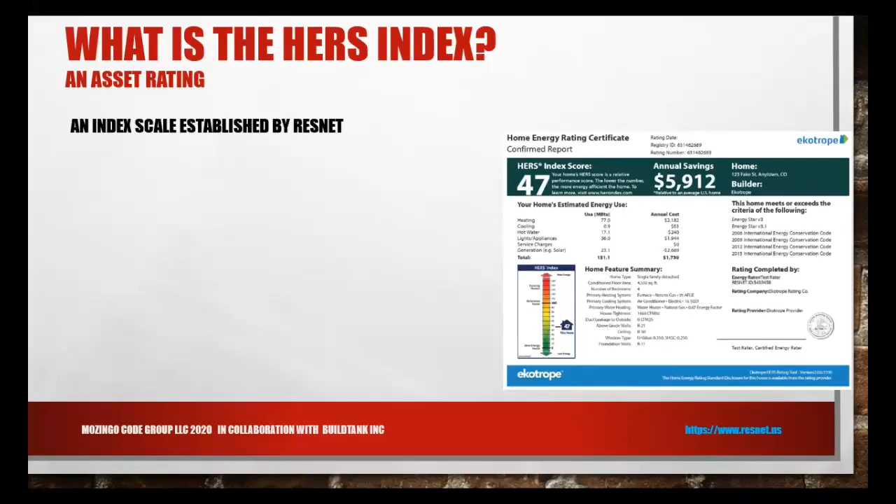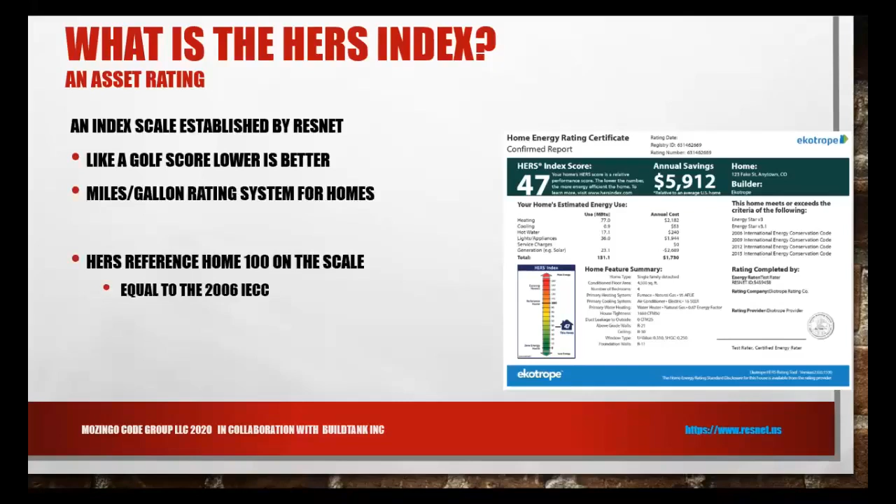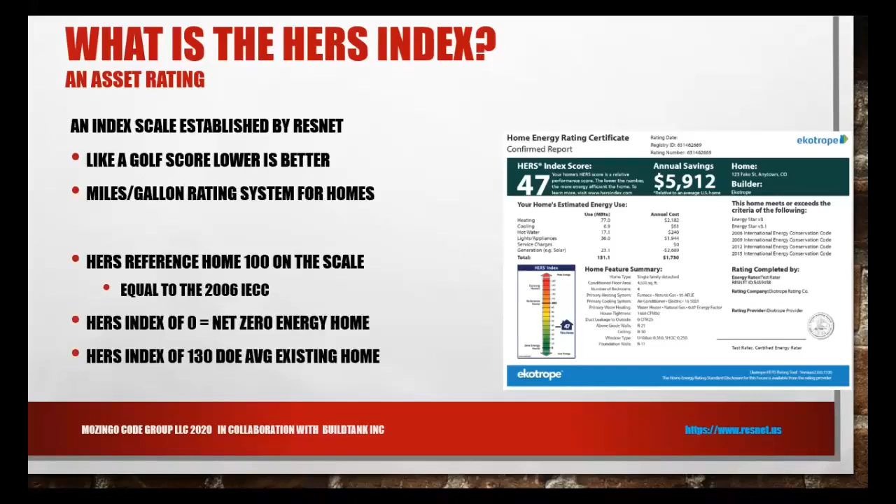As we started going through it, we started diverging between the score and the code a little bit, so we're going to talk about what that is. A score of 0 is a net zero energy home, and unfortunately, DOE has determined that a score of 130 is about an average existing home - not a new home, but an average existing home. So we're trying to stay definitely below 100.

But a HERS score doesn't meet code compliance. So as a plan reviewer, if you get a HERS index score that says 47 and you have to be 56, you're like, okay, it works.

That's not all there is to it, right? We need to look to make sure that we're using the energy rating index score and not just the HERS score. And I'll tell you why they're different.

But first, Denver's amendment, the score has changed a little bit over the last couple cycles because of different backstops that they've put in there and mandatory requirements. But right now, the score in Denver per Denver's amendments is 56. So making sure that you get that score of 56, and you still have to meet all the mandatory requirements that are listed, and in Denver's amendments, it also includes 403.5.3, which is making sure that your hot water pipe insulation is installed. You will be required to meet the hot water pipe insulation.

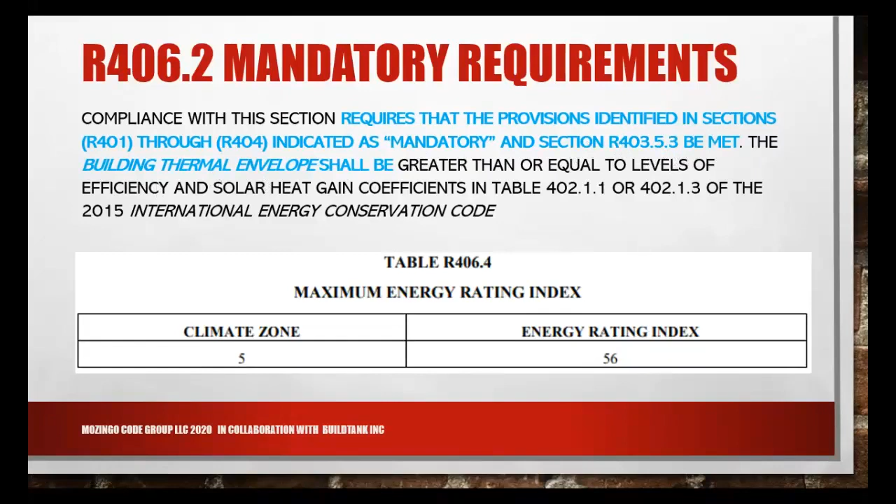All right, so mandatory requirements of the code, that we talked about that a little bit. Prescriptive is just telling you, here's what you got to do to meet the base minimum of code and all of those requirements. But then mandatory says, okay, you have to have that certificate. You have to meet your air leakage. You have to do that air barrier and insulation table. You have to seal your ducts. All of these things that you have to do. You still have to do those.

It looks like this when you're doing an ERI. It's kind of like this twin house. It's computer modeling to say, here's how my house is going to perform, and here's what score I'd give it on the zero. How close am I to zero net energy? And it's a twin house concept.

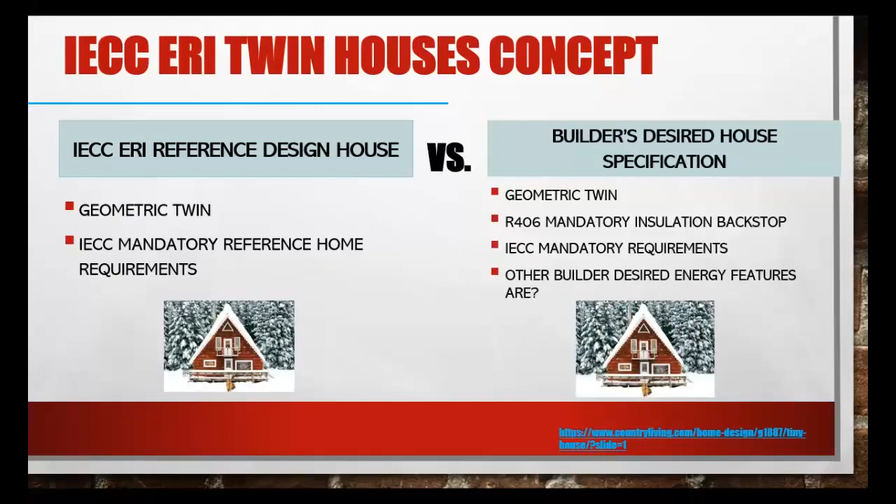If you take two houses side by side in a computer, one of them's meeting the mandatory requirements of the code, and one of them is meeting what they want to put in there, and seeing, okay, here's how I want to build it. Here's what the code says. How close am I, and am I equal to or using less energy than that house? And so you just have to have a lower index rating than what it would be at code. So equal to or less. So you're at 56 or less, and you're golden.

Seems really hard to meet, but there are a lot of things that can really affect that score that you can't use in any other pathway. I can put in high-efficient mechanical equipment and lower my score. I can put in solar and lower my score. I can get more lighting efficiency than the code requires and lower my score. I can build a better, tighter envelope than the code requires and lower my score. The possibilities are just a lot out there. So it's good to become familiar with that score.

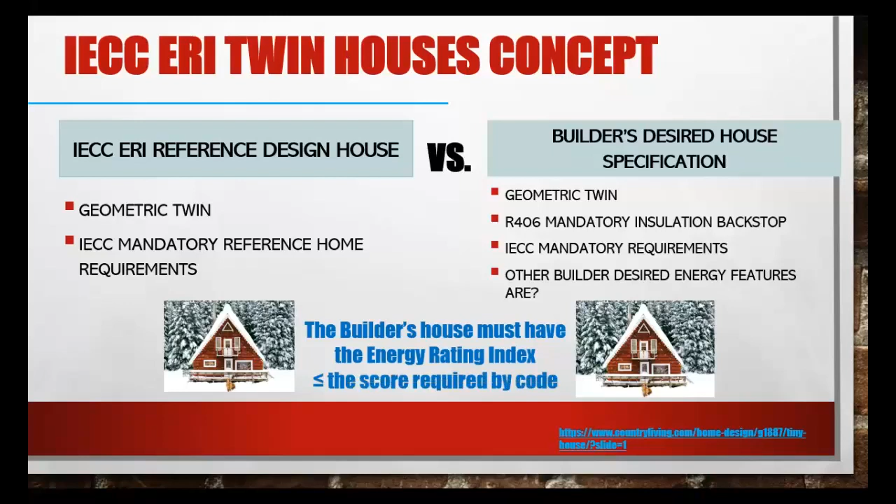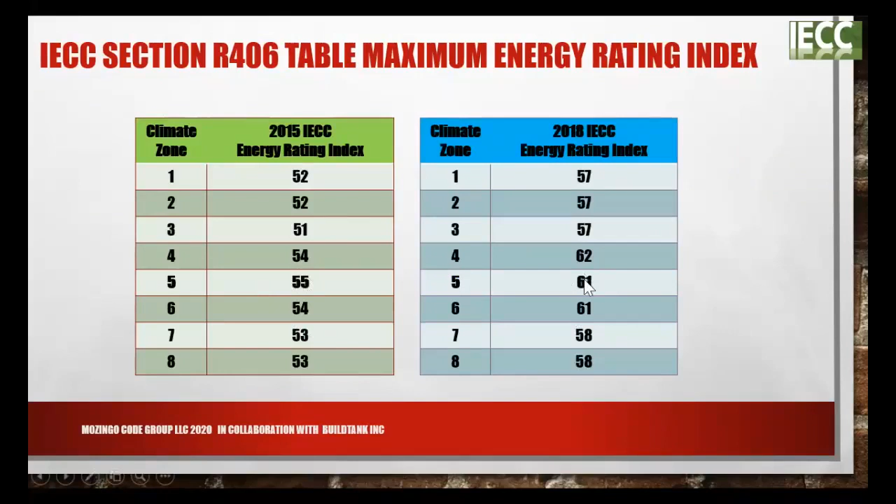In the 2015, in our climate zone, you had to get a score of 55. In 2018, it went up to 61 for some various reasons, but Denver has amended it to be 56, which is probably a little bit more reasonable with the changes. So that's the score that you have to get, but again, that's an ERI, IECC ERI score, not a HERS index score. So you still have some backstops.

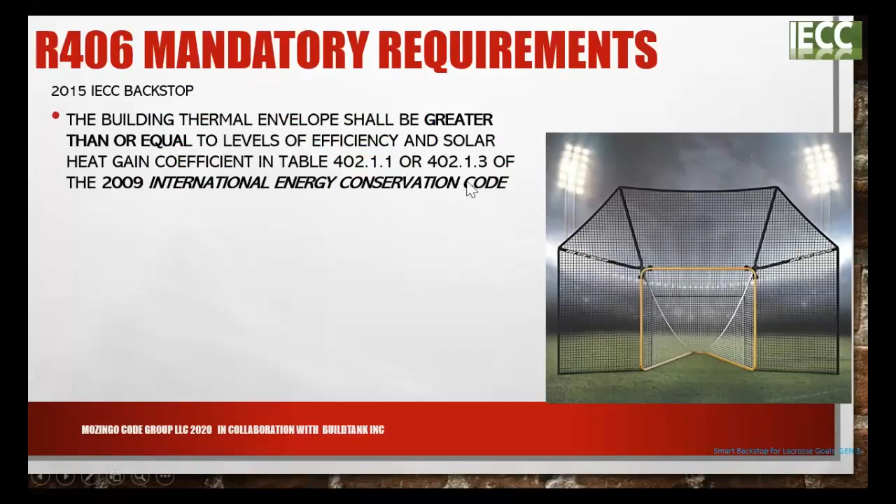The 2015 said, okay, well, if you're going to use solar on your home or whatever, you no matter what, you got to build at least to envelope to the 2009 code. You can't just trade off to nothing. And the 18 says if you use solar, you have to at least build an envelope to the 2015 code. The idea being that if I use a bunch of solar to drop my score down to get me under the 15, if I move or I change ownership or something happens and that solar goes away, I don't want to be left with this horrible house. So we still have to build a good house and then trade on top of it. So that's what that's looking at.

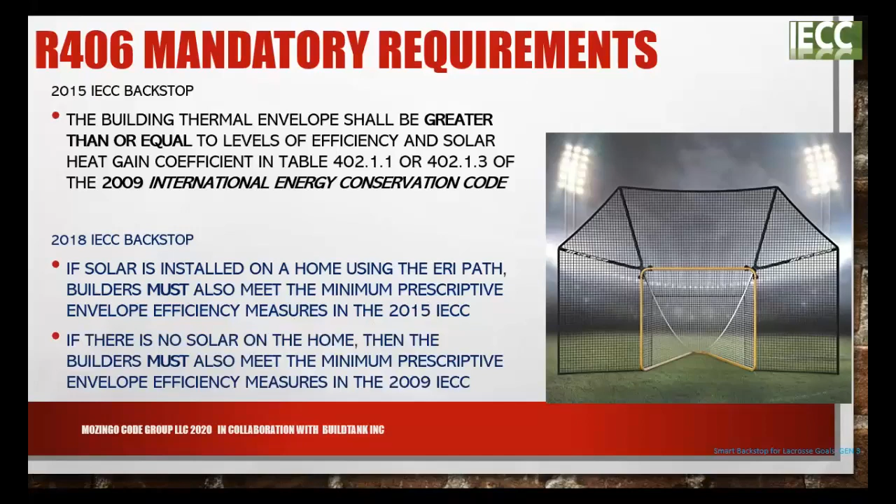So here's the basics, though, really. There's not a lot of change between 9, 15, and 18 when it comes to the envelope in our houses. The biggest change, there was a change in 2009 about the attic insulation and the basement wall insulation and the windows. But in 2018, none of that changed. The only thing that changed was this U factor of the windows has to be 0.30. So that's really the only change. So you're still building pretty much the same house anyway.

A HERS rating, a Home Energy Rating System, isn't code compliant, so just know that you have to get something else. The HERS score just rates the home as it is, not whether it meets code, and gives you a score. It's a great score, but it does diverge a little bit, mostly having to do with ventilation.

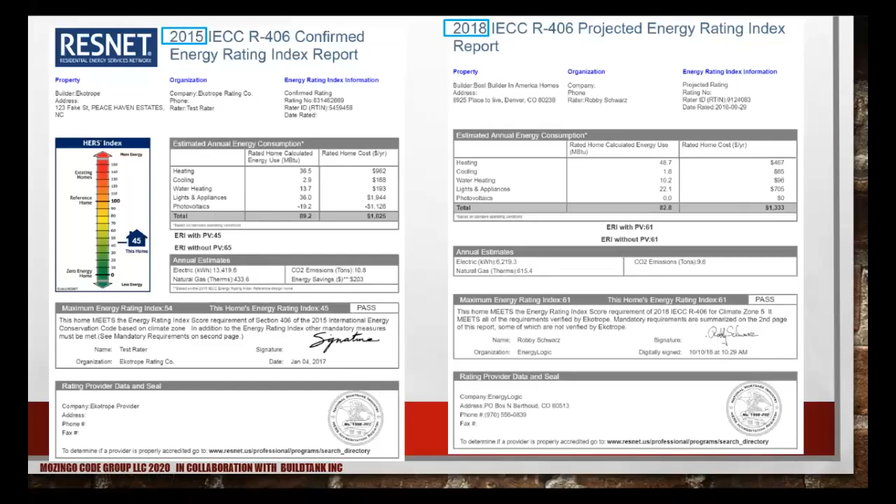Why is there a difference? It's because of the way the HERS index is written versus the IECC. They're written in totally different processes - one's an ANSI process, one's a consensus process, and they're written at different times. The 2018 does reference the ANSI standard, the RESNET standard that the HERS score comes from, which is fine - we're getting closer to bringing those scores back into alignment.

However, it's saying to use them except for the ventilation, which is different. The rates of ventilation are different in each code, so that brings the scores to diverge. One used an older ASHRAE 62.2 formula and one used the newer formula, so now they're diverging - one requires more ventilation, one requires less - so it definitely makes the scores different.

So they're starting to diverge, and what happens is the IECC references a standard, whatever that standard was in place at the time the code was written. At the time the 2018 code was written, the 2014 standard was in place, so that's what we get, and that had a different formula than the newer ones. RESNET isn't tied to the code - a HERS score isn't tied to the code at all, so it uses the most recent version of its own standard, 301, and the most recent version is 2019.

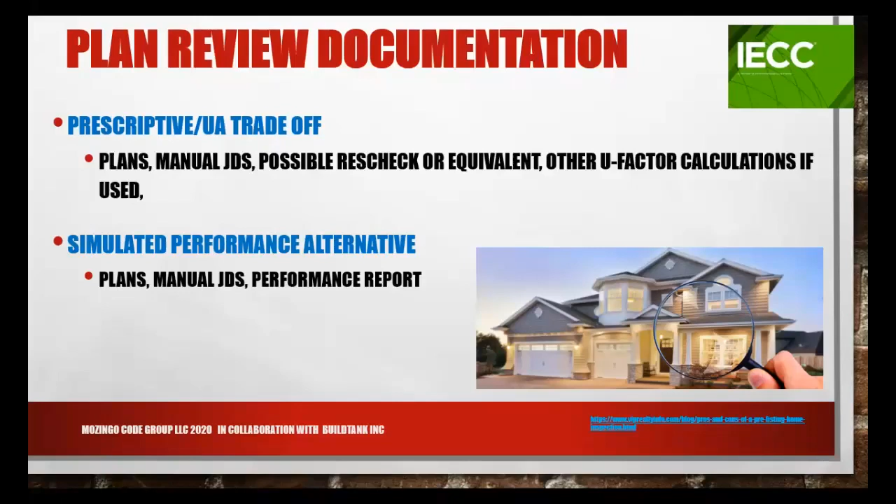The simulated performance path and the ERI use the exact same software and the exact same people—it's just different buttons you click. One is a cost report: am I saving, is the house I'm building costing less in energy than if I built it strictly to prescriptive code? And this one is using a score: is the score equal to or less than if I built it to prescriptive code? So those are just things to know while you're going through this process.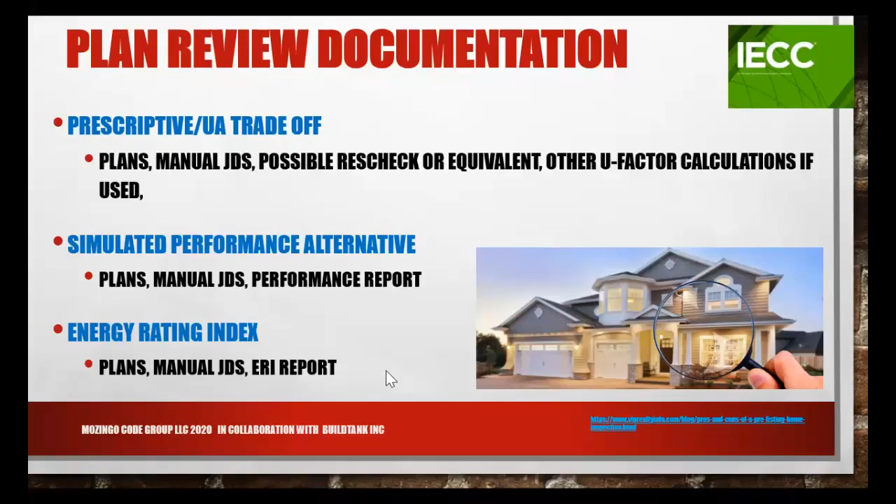All right, now we're going to get into 407. Anybody who's done commercial plan review is probably used to this because it's been in there since 2012. This is the additional efficiency package option.

Instead of looking at this as, oh my gosh, one more thing I have to do, or oh my gosh, here we go, more stuff, I would challenge you to redirect your focus. I would challenge you to look at this as, wow, look at the options we have available to us. They could have dictated what you did, but they gave us options and let us choose what we want to do. That's how I look at this every time when I'm on a committee, or helping somebody write their code, or teaching it. These are options.

We could have told you what to do, but we gave you the options instead. I'd challenge you to look at it that way. We want to get more efficiency out of our buildings, but we're going to let you choose what works best for you to get there.

With some guidelines in it, you have to choose at least one of the following. You can choose more, but you have to choose at least one if you're going prescriptive. If you're going performance, with either the simulated performance path or the ERI score, you don't have to do this because you're already going to show that your building is performing at the right rate. This is talking about this path.

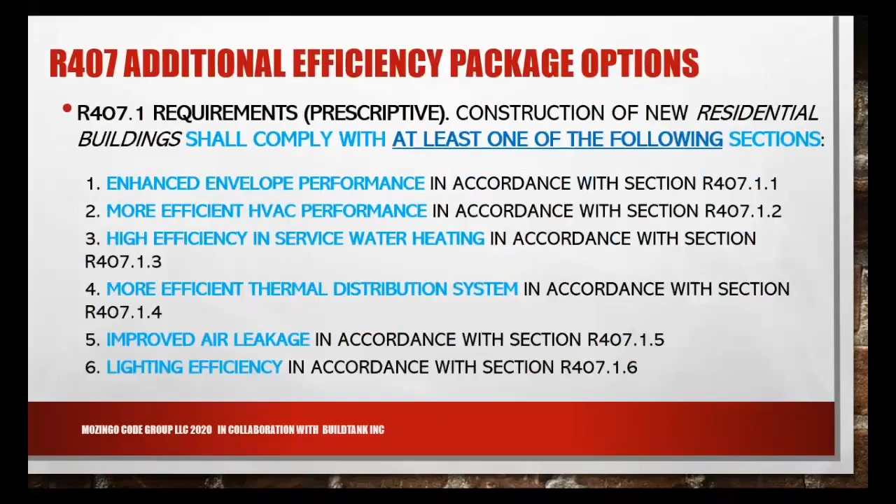I'll tell you that 407 did come into the 2021, but in a way more complex fashion. So you're going to have 407, these efficiency packages, to deal with in 2021. If you're outside of Denver, right now in 407 these are your options. In 2021, it's going to be this big, huge, 4 or 5 pages worth of point system. You have to get a certain amount of points in each climate zone, so it looks a little more complex. That was put in front of Denver, but the testimony when I was there was that they didn't want to bring in that complexity right now. We'll wait till the next cycle and see how that goes. So right now, these are more simplified options.

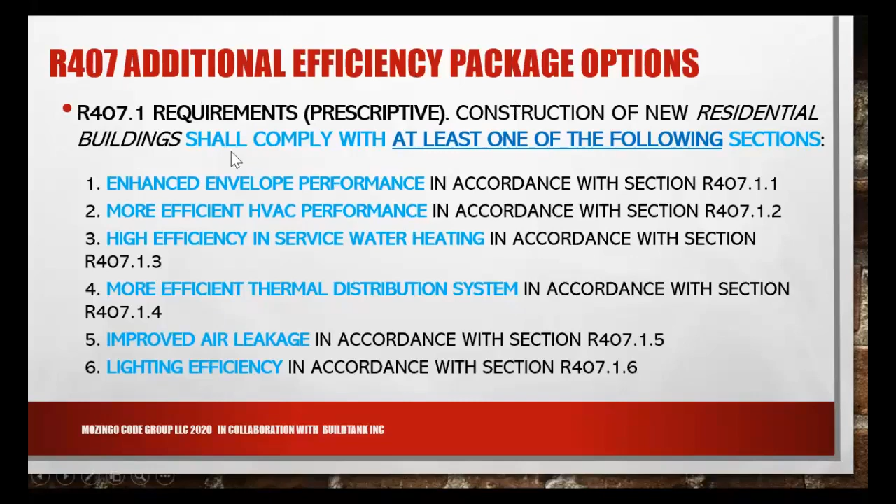Enhanced building envelope just means you're already required to get a blower door test, but now there's the UA, so you have to build a good envelope. This is just saying I'm going to build a better envelope, maybe get that RESCheck and pass 5% better than code. So I'm going to do 5% better in my thermal envelope, whether it's my framing, windows, insulation, or whatever, somewhere in there, or a combination.

How does that work? A lot of people use RESCheck to do that. It's like the same twin house concept we talked about. It's looking at: if I built the house to code, here's what my U factor for my entire building thermal envelope would be for the whole area. But here's what I want to do instead. As long as this is 5% better than that, you could comply.

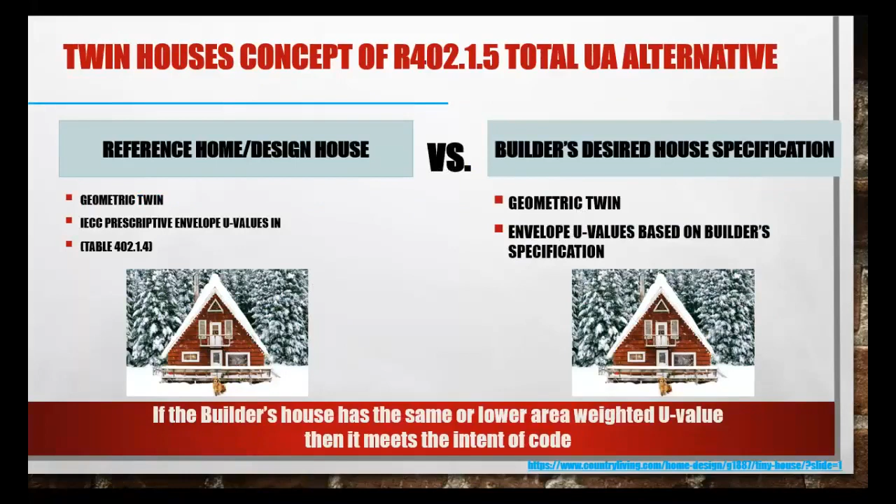It allows you to use some trade-offs of insulation and wood. Maybe if you put your framing at 24 inches on center instead of 16, that gives you a much better U factor, because wood has got like R1 per inch, whereas insulation can get up to 5, 6, 7 per inch. So less wood is good, right? Or maybe you're putting in better insulation or a better window. What are you doing to get that better U factor?

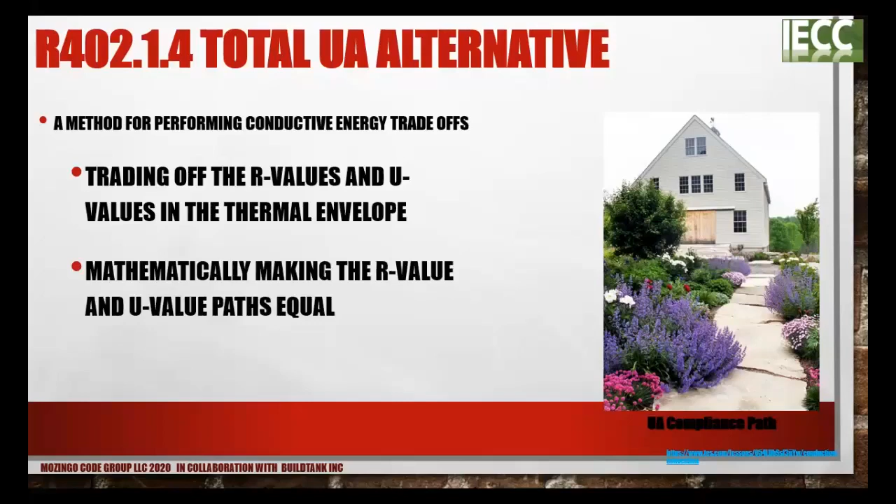Anything that has an R value can be turned into a U factor - it's just 1 over R equals U. So you can convert your framing materials and building materials into a U factor and see what your U factor is using something like RESCheck, that tells you how much better than code you were. You'd just need to say you were 5% better than code to choose this option.

You also have the option of better HVAC equipment - 5% more, or better equipment, greater than or equal to 95 AFUE. So a 95% furnace, a 10 HSPF, or 15 SEER heat pump. We can't ever require that you go higher efficiency than the 80% that the code, the NAECA, requires, unless it's an option - and this is definitely an option. You can put in a 95% or better furnace and meet the code requirement.

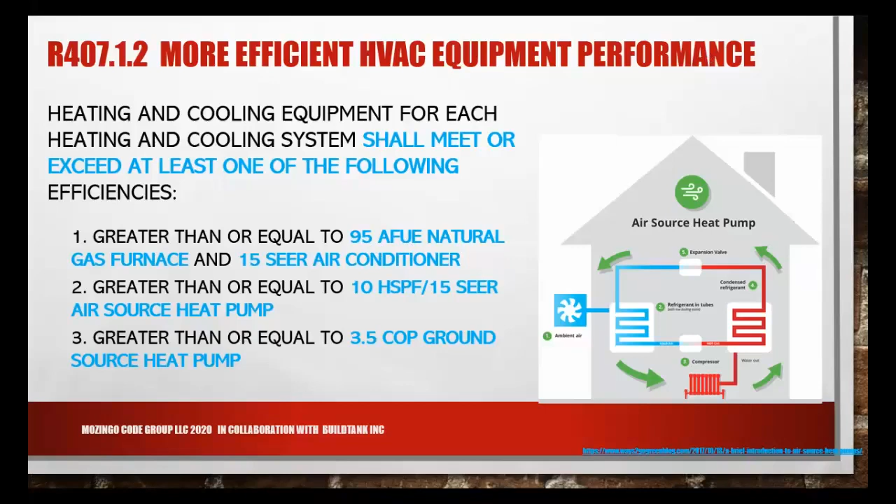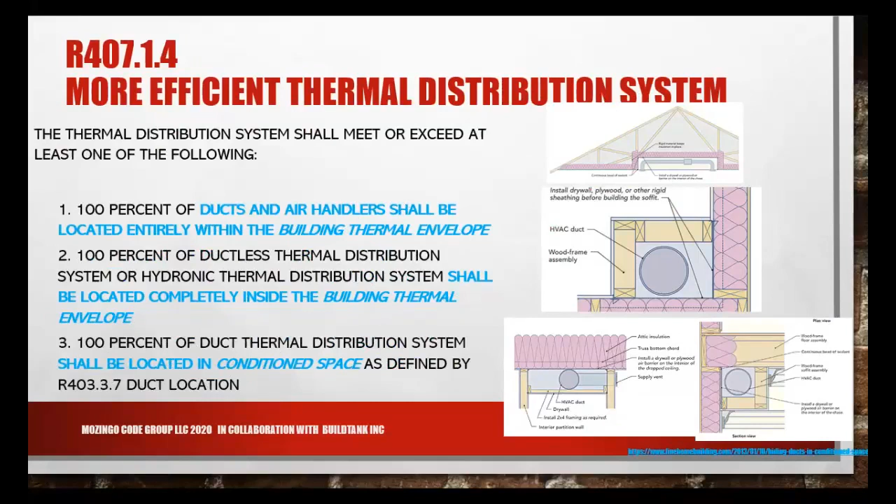You can put in a better hot water heating design, with either better hot water equipment or some solar thermal or something, to meet the requirement. I love solar thermal. A more efficient thermal distribution system - that's a better duct design, better duct testing, better duct leakage. But everything has to be inside the envelope and performing well, so 100% of everything is inside the envelope - the air handler, the ducts, and everything that way.

You can also do better air leakage - so if you're doing 2.0 air changes per hour or better, then you've met the requirement.

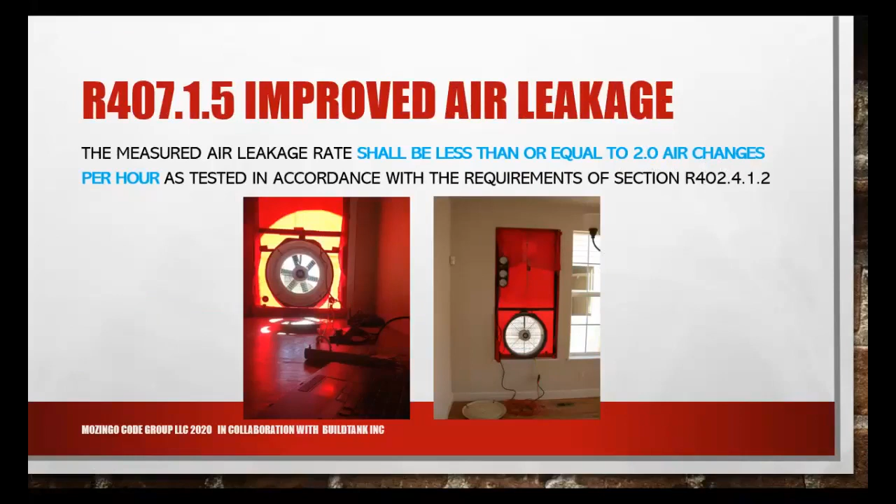A lot of people will choose this. A lot of people are already doing all high efficacy lighting, or they're already doing high efficient mechanical, so those will be pretty easy options for them to choose right now.

But how does this look on the plans? When I'm doing commercial plan review, I'm always looking to see what did they choose as their option, is it documented, and making sure that, so say they did this high efficacy lighting, that this is their choice. Where did they identify that, and does their lighting plan match?

Residential, you don't always get a lot of lighting plans, so it's a comment: hey, 100% of your lights have to be high efficacy because you chose that as your option. Or on your mechanical plan section of the plan, or your manual J, making sure they chose 95% because that's what they said their option was going to be.

So you have to make sure that they chose one of these options and then make sure all of the documentation says the same thing. Their energy report, their ERI, whatever, everything says this option was chosen or that they're meeting that. So that's at plan review.

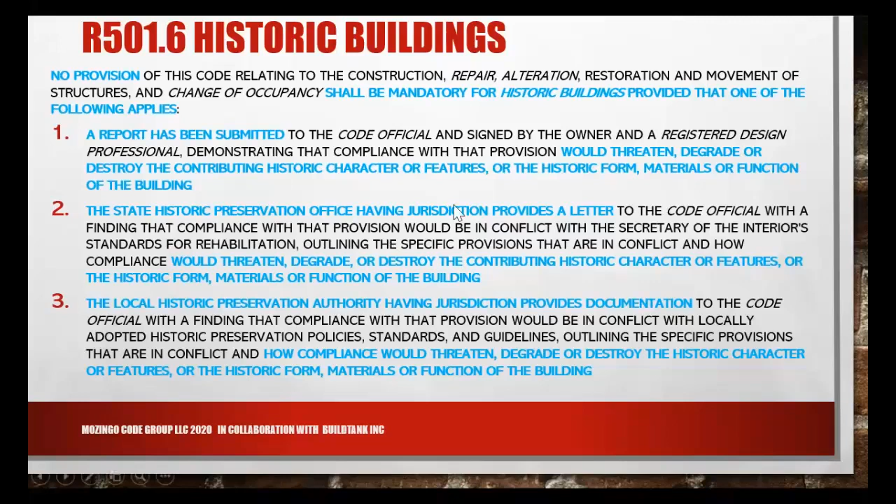So you'd have to, you get to say you're out, all historic buildings don't have to comply with the code. No, we want you to put some thought into it. So you tell us why you shouldn't have to comply. So if you're a historic building, just making sure you're getting that documentation and that it's coming from the right person, right, that's allowed in the code.

Then the only other changes in this path were for additions. There were some additions to existing building systems or portions shall conform to these provisions. That's not a change, but it can't create a hazard or condition worse than it was. They can't make the building worse. That's always been in there.

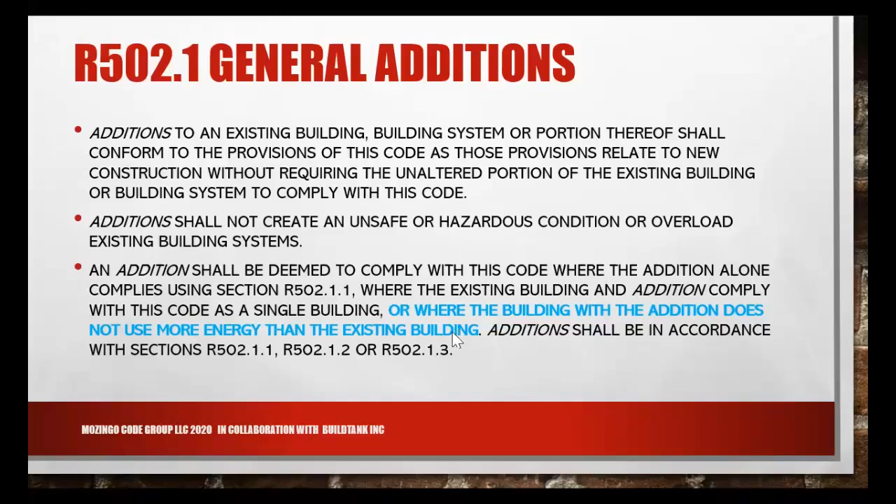The change is in here: an addition shall be deemed to comply with the code where the addition alone complies, or where the existing building and the addition comply with the code as a single building, or where the building with the addition doesn't use more energy than the existing building. So that means you're building a pretty good addition in order to have it when the two of them added together don't use any more than it did without it.

Right? So trying to figure out how you do that, sometimes people will do a blower door on the house before you do the addition and one after, just to make sure you're not worsening the air leakage, or do a report on the house before and a report after to make sure.

Then you have the air leakage rate of the addition has to comply where the air leakage rate of the addition and the alteration that are part of the project is less than or equal to the air leakage rate of the existing building. So same, you can't use more energy and you can't have more air leakage. So you're going to do a pre and post blower door, and it can't be worse.

How do you rate? Putting that on plans is pretty key to make sure they know this is coming. So it's simply comments making sure they know a pre and post blower door test will be required when you're doing an addition.

You can also do an ERI to show compliance by doing a score pre and post. The addition shall comply where the energy rating index of the addition and existing building, and any alteration, is less than or equal to it if it was modeled for the existing building, so you can't be worse. It gets tricky modeling an existing building because you don't always know what that insulation value was or what those window values were, so you either have to make a lot of assumptions, or it's great when they have those certificates, because you say, oh, here's what went into that house.

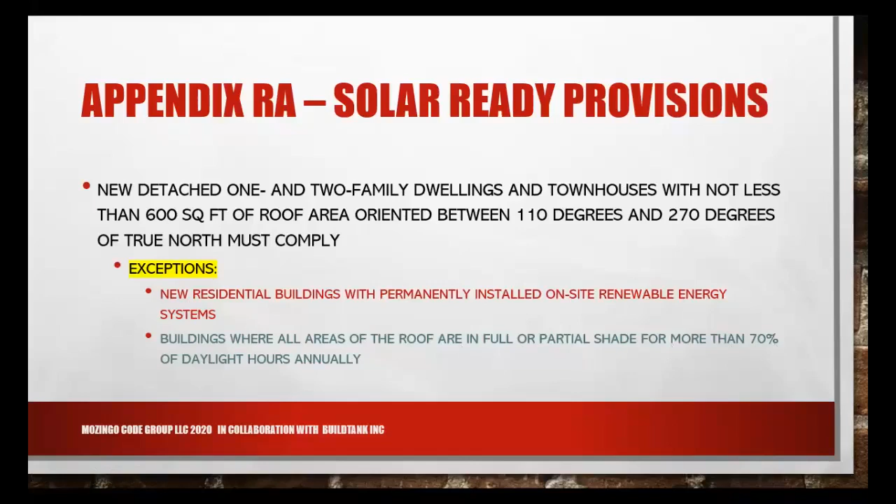So it's really just wanting you to put thought into your design so that it's evaluated and easier, so if somebody wants to come in and put solar on after the fact they could. It's just hard after the fact, because there's a huge cost to go back and get it all reevaluated when you could have just said, yep, we've evaluated for it, it's ready for you.

And looking at the roof penetrations, they need to be sleeved and prepared for a future conduit. So making sure you have a... this is a Denver amendment, to make sure you run that sleeve and that there's a capped sleeve there ready for conduit in case somebody wants to do it.

It has to be a capped roof penetration shall be provided adjacent to a solar-ready zone located on a roof of not greater than 1 in 12. The sleeve shall be sized to accommodate future PV conduit, but shall have an inside diameter of not less than 1 1/4 inches. So there are some requirements in there.

So those are pretty much the requirements. When you're doing plan review for that, you need to make sure they have more than 600 square feet of roofing pointed in the right direction, and if so, did they meet the requirements of that appendix? That's Appendix RA in the Energy Code, also in the IRC. So just make sure they are meeting those requirements with Denver amendments for the capped sleeves and stuff, so that they're prepared for that. That is what I have as far as amendments and everything.